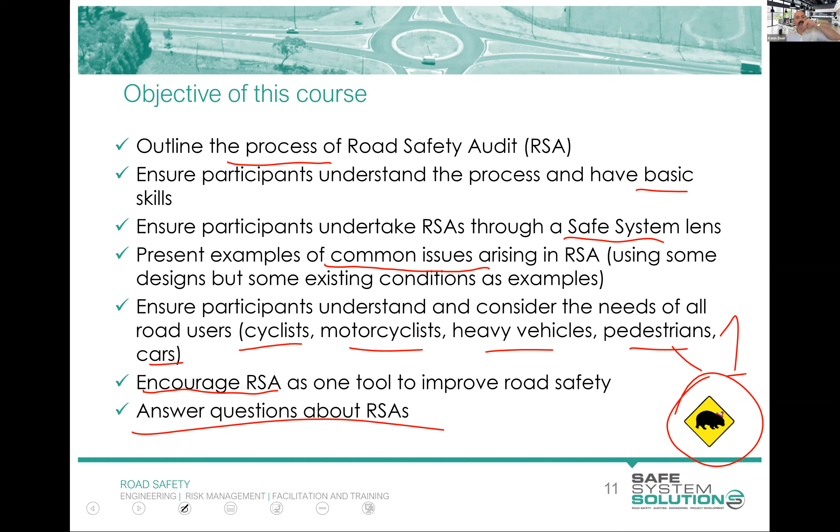Okay, going to be nice to you here. Wally count is 1. That's what you're looking for. That's all the help I give you for this course in Wally counting.

Okay, so where do you go to get all of this guidance and information about road safety auditing? Well, Austroads and a Waka Kotahi Safer Journeys document from the old Safer Journeys. They're the two key resources for New Zealanders in road safety auditing. Now, this document is very recent, and I was the project manager and specialist technical advisor to Austroads on that one. And that was released early this year.

This document's a 2013 document, and so it's a little bit old. It's got some really good stuff in it still. There is work happening now to shortly release some updated guidance. So I'm going to talk to you a bit about some of the new stuff in here that I know is going into future documents, some of the stuff in here that's going to continue, and give you hopefully a broad idea of what road safety auditing is and how you might go about doing that.

Now, this diagram is kind of complicated, but it sits early on in the Austroads Guide to Road Safety Part 6, which is road safety audit, that document I just showed there, and it talks about the road infrastructure life cycle stages from your network planning all the way through to operating and maintaining a road. And what it shows there are different safety interventions within those phases.

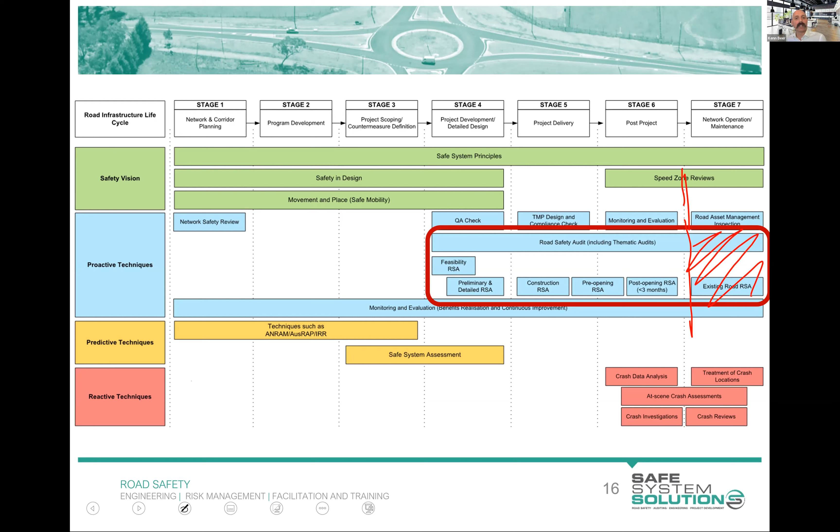The first thing, though, that I want to point out straight off the bat here is a common misunderstanding of road safety audit, and the reason for this is because of that term audit. People think an audit is like a financial audit where it is, are you complying with all of the standards and codes and the like? And immediately that is what people think about when the term road safety audit comes out. It is checking, did you meet all the standards? Well, that is not what a road safety audit is. Okay, a road safety audit is not a standards review.

However, we may review how things are in comparison to the standards if we believe there's a safety issue. But certainly, as a road safety auditor, you can look at a new design, a plan, and it can meet all of the standards, and you may still report a risk, a hazard that you are concerned with. And that could be because the standard is deficient, right? Or the standard's been around forever and nobody's critically looked at it and we know it's an issue. So it could be that. It could be the way that the standards combine, right? And it's just that you can't have foreseen all of the ways standards will come together.

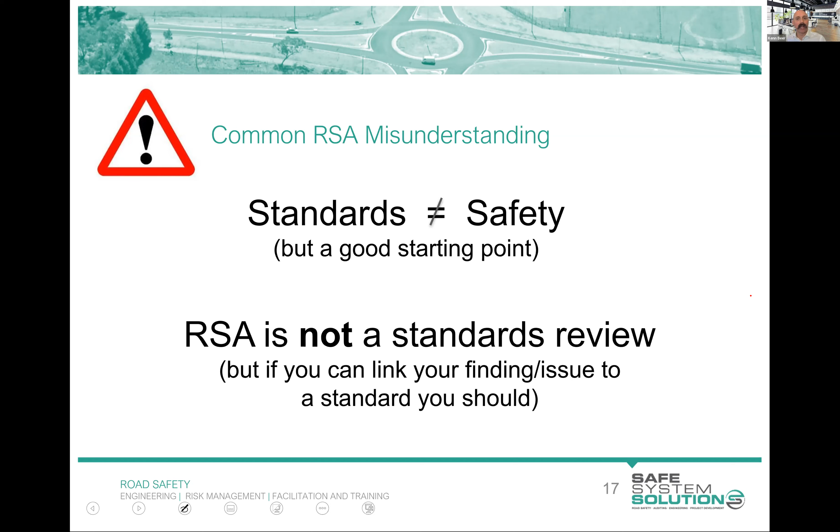However, there are some really good fundamentals with a lot of the standards and guidelines that we have, and those should be something that we're referring to and knowing about. But I think the easiest way to explain that conundrum of safety versus standards is just an example or some examples. So I'll jump into that.

And I'm going to use this example of a crash on a fairly new motorway. Unfortunately, this was a fatal incident. The heavy vehicle driver was killed. And the design was done by amazingly experienced, big multinational organization designers, and it was really good design. The road was built, and it's a really high quality road.

But fairly early on within its opening, this incident happened, and you scratch your head and you say, well, how can that happen? How can we build a $1 billion road and then fairly early on somebody is killed on that road? And you look at the design of this and you think, okay, well, what happened here?

Road safety audits aren't about crash reconstruction, analysis, and reactive looking at crashes and working out what happened. But I use a lot of this in the course so you have a better ability to predict crashes in the future. So knowing what's happened in the past helps you predict a little bit what's happening in the future. But the design of this road had a barrier system on the approach to the overhead gantry here. And you can see the barrier system there.

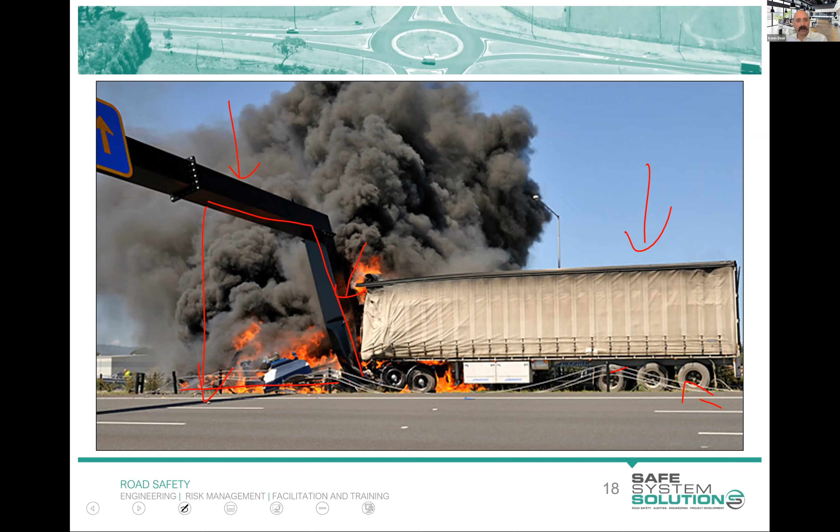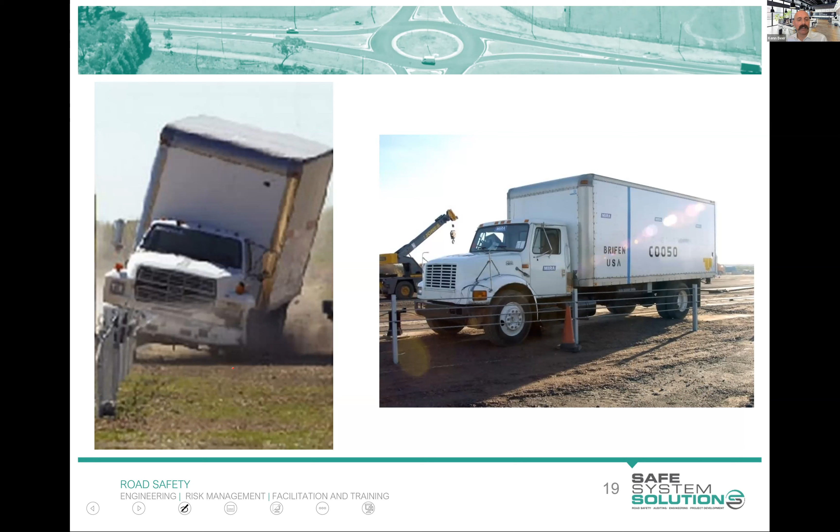Let me give you another live example of something that is a common road safety audit issue that I see a lot of, and I'm sure you will see a lot of as you get out there, and some of you will have seen a lot of these already. This one just happens to be a duplication of a road, a major new subdivision here, huge subdivision, big, massive complex with shopping center bits and apartments and everything. So it's massive. And so it's a signalized intersection that's being created. There's the duplication of the roads, some realignment, quite a bit going on there.

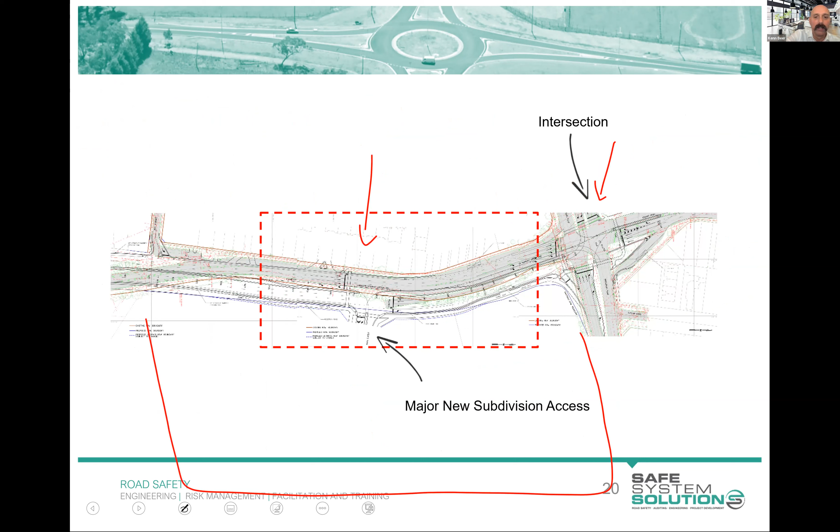If I go back a slide here, you can see that there's an existing large intersection up here, and the new bit is there. So basically all of this is new subdivision sort of complex. So anyway, if you're a car here and you're traveling along, it's a 60 km/h speed limit. So maybe you're traveling along a little bit faster, maybe 63, 65 or something, ticking along, and all of a sudden you are in a right turn lane.

Now, we term this a trap lane, okay? And it's one of those terms in our industry that I just marvel at and go, whoever named that just deserves an award, because it is exactly what it is. You are trapped, and you can have left turn trap lanes, right turn trap lanes, but you are basically driving along and forced to do something you do not want to do. Your lane ends. Now, what we would like to see is that lane continues straight through, and in order to do a right turn, you have to deviate off into a new lane.

That's nice, but it comes up surprisingly often that we see a new design with a trap lane in it because of land constraints and the different challenges that project teams have. Huge challenges in cost, in cultural heritage, in environmental, in earthworks, and all of these different things. And the way it configures is that they want to introduce this trap lane. Our role as road safety auditors is to identify that, and I'm sure that the designer knew that they were creating a trap lane there, but decided that was just something that had to be accepted because they can't do anything else in their mind.

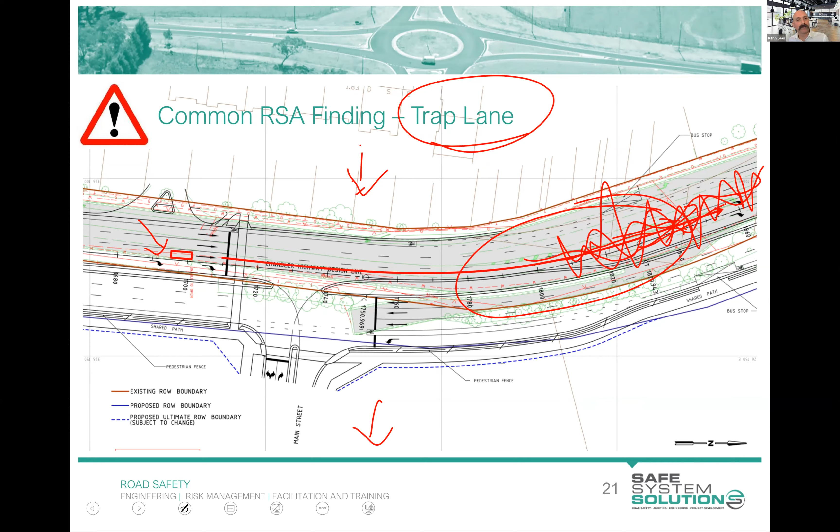Okay, enough talking out of me. I'm going to get you to do some thinking and some looking and some analysing. So we're going to analyse a crash now. But remember, road safety auditing isn't about analysing crashes. It's about predicting them in the future and trying to weed them out. But it's always good to try to unpack them so you can do that in your mind for future scenarios that haven't occurred yet.

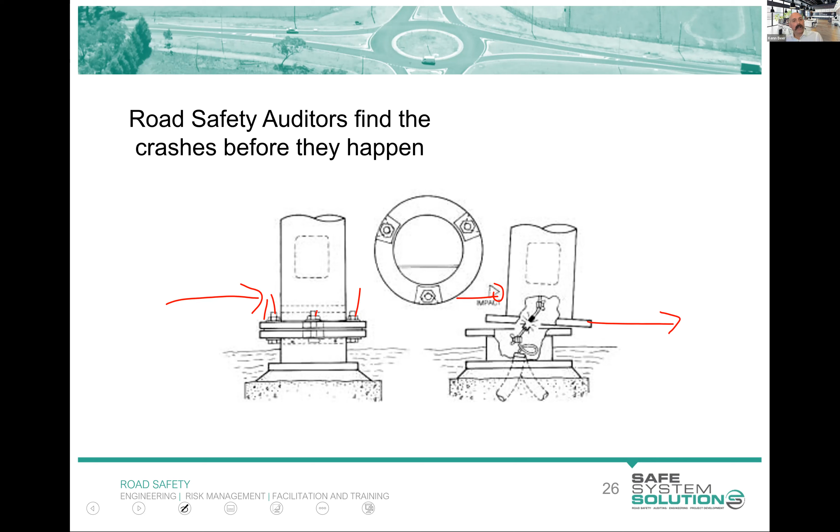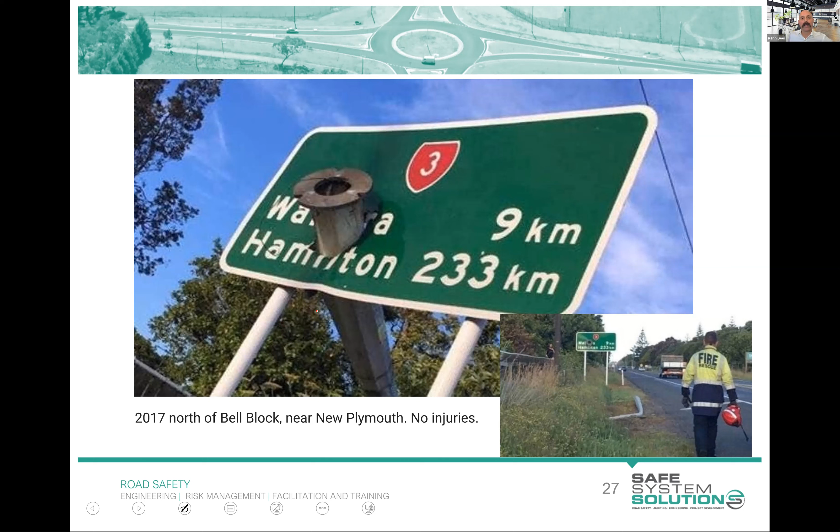Now, we certainly have those in New Zealand. There's an example of a slip-based pole in New Zealand that flung its way through a reassurance sign there. Nobody injured as a result of that. You can imagine the speed that must have happened in order to get that up there. But you imagine if that was a fixed pole, we would certainly be seeing death or serious injury, at least for the occupants of that vehicle. So a wonderful road safety feature.

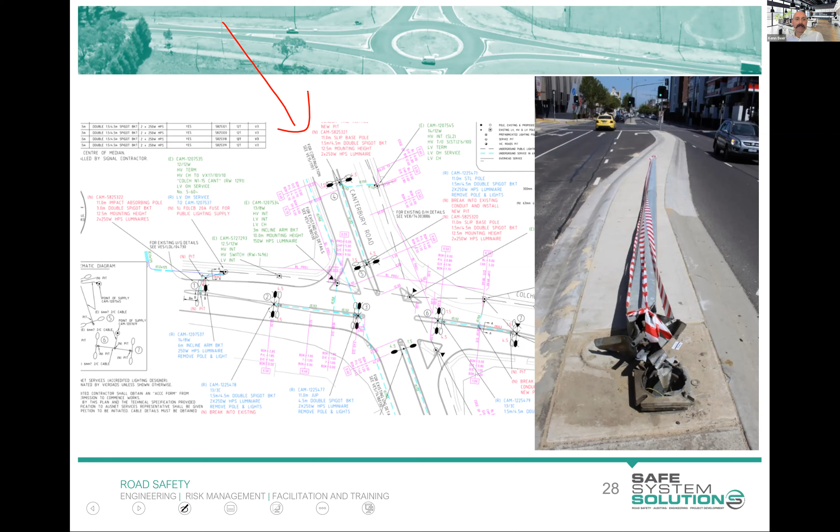Now, here's a random New Zealand street, and I suppose the question I have for you now is, why would or would it not be appropriate to have slip-based poles on all of the lighting in this location? So is that a good thing or a bad thing? If a vehicle leaves the road and they hit the pole, we want to make it as friendly as possible. Is it a good thing? And what are the risks associated with utilizing slip-based poles in these locations? Okay.

Yeah, so lots of good points there. I think Nick was in first with the main one I was looking at, which was hitting pedestrians or the like. So you have to understand and balance that risk.

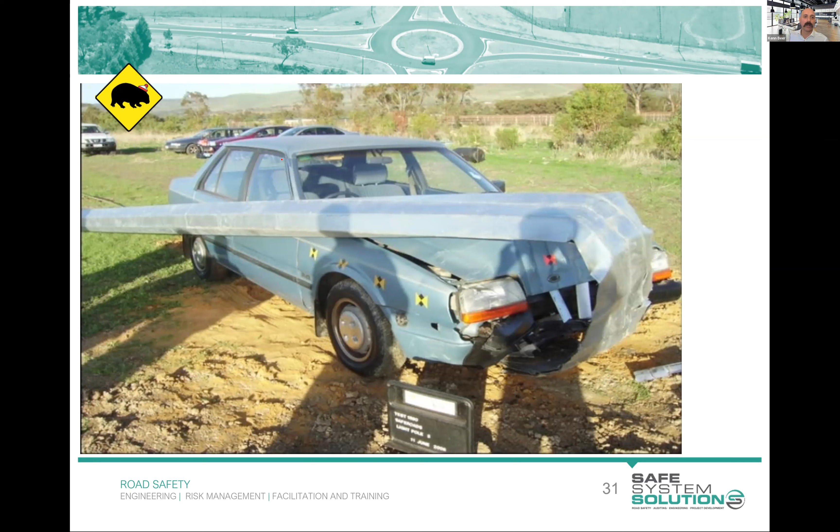So you can see here an example of the pole, and it sort of wraps around the vehicle to a degree and stays within that. It gives it a bit of extra cushioning, but it's certainly not what you would use in high-speed environments because you lose a lot of the advantage of that complete slip base. And also in areas with high numbers of pedestrians as well, you're still going to have something that sort of comes down. But it is another option there.

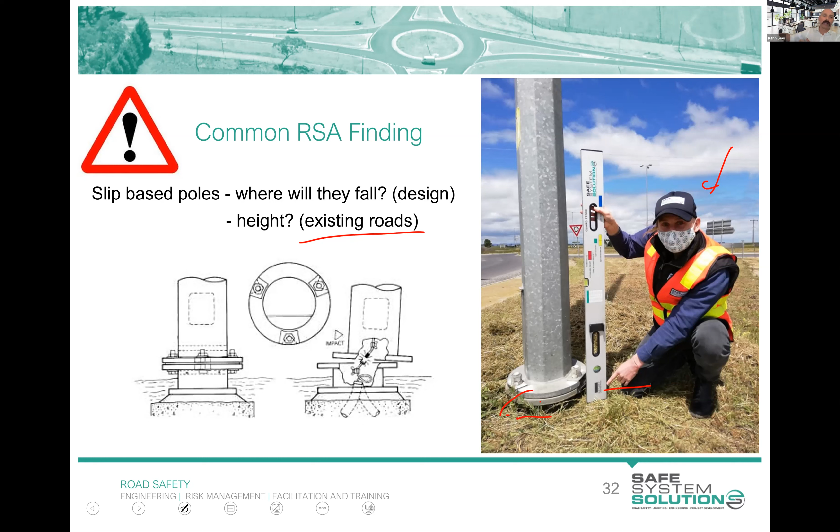So you can start to see now when you get that design and you're looking, okay, this is rigid and vehicles will be leaving the road at high speeds. We really need to make this breakaway on impact. Slip-base is right, or that would be dangerous because if I hit there, it'll fall into a pedestrian area. And so you're trying to proactively think about risk before the crash happens. So road safety audits are proactive.

The black spot investigation or crash reduction study is more your reactive treatment. So if you're looking at a route, it's got a significant crash history, and you're going to analyze the crashes, the types of crashes, the locations of crashes, the details of that, and come up with maybe a crash matrix and crash diagrams and all of that sort of stuff. You're doing a crash reduction study. You're doing a black spot investigation.

It still will come out with infrastructure improvements that could be made, but the audit is really when you've got a design in front of you. They plan to do something, or they've recently built something and you're checking. And you're saying, what are the crashes that could happen when they build this new road, when they create this new roundabout, when they build this new shared path, when the new bus interchange is built? Yeah. And you think through how a road user is going to use it and what crashes could happen.

A question that often comes up is, should you look at the crash history as a part of a road safety audit? And there is no right or wrong answer to that. There's a bit of personal preference associated with it, but there's also a bit of understanding of what is the scheme that's happening? What is the change that's happening? So take, for example, my little comment there about a new bus interchange. And maybe it's a whole new thing, and the whole area is being transformed significantly, new roads, new changes. Maybe it's a big interchange. The crash history of the site is somewhat irrelevant because it's all going to change.

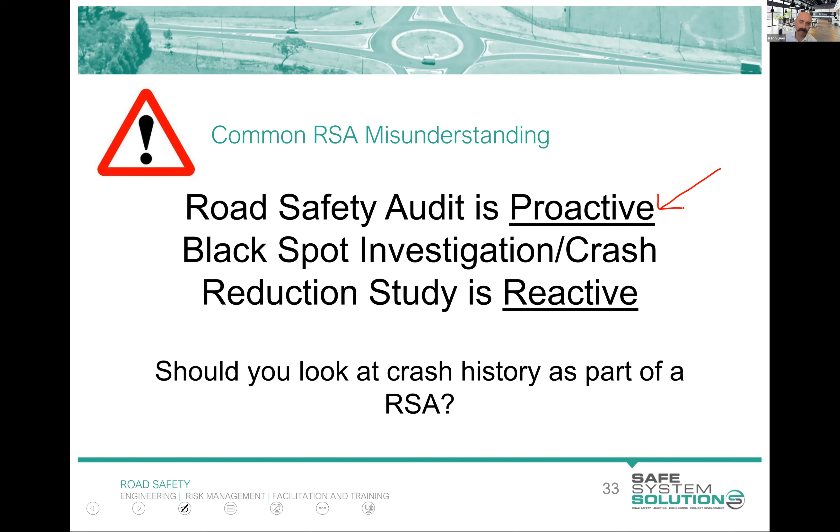Some random sort of evaluations around the world of road safety audits showed some pretty amazing benefits. So the biggest one was out of Canada, and it showed a benefit cost ratio of 36:1 for undertaking that road safety audit at the design stage. And quite a few jurisdictions do these existing conditions road safety audits, which is kind of this hybrid mess of a crash reduction study and a sort of existing conditions, just look at a road, but that was at more of a 6:1.

And the reason for that change is that at a design stage, altering the design with lines and changing the lines and how something will be built is very low cost in most instances. Sometimes there's added cost to it, sometimes it saves money. But when you've got existing roads, it's actually going to be physically changing something and building something. So there's a difference in just the cost associated with that.

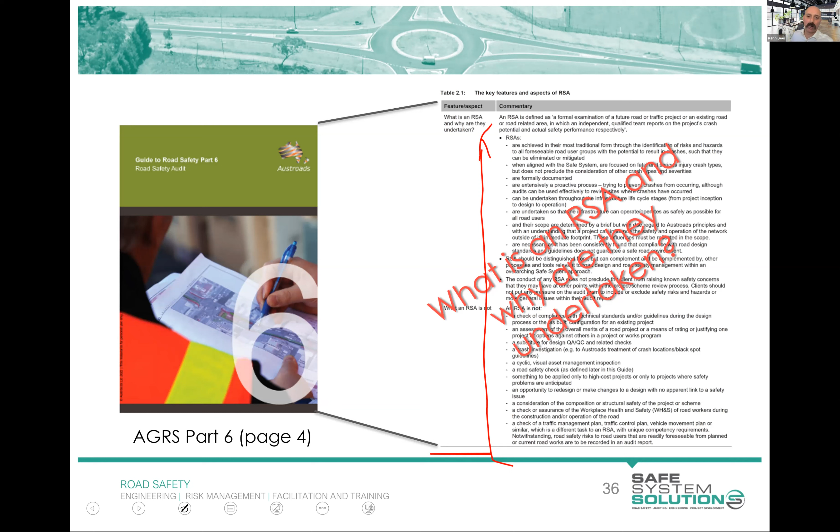So road safety audit is defined in the Austroads Guide to Road Safety Part 6, and it's a big definition. It's on page 4. And so I'm not going to go through and just read aloud all of that text, okay? Because you can do that yourself. There's lots of things in there that talk about what it is and what it is not, what it should include. I'm going to take you through this throughout the course, but I've picked one particular thing out of that, which quite well sums up the overall fundamentals of road safety audit, and I'll grab one from the Waka Kotahi document as well.

So it's a formal exam. I've got some key words highlighted here. A formal examination of a future road or traffic project or an existing road or road-related area in which an independent, qualified team reports on the project's crash potential and actual safety performance respectively. So some key things there.

This is a formal process, and next session, I'm going to take you through the steps of a road safety audit. It's not just a casual check of a design. It's not just going out to a site and having a quick look and jotting down a few notes. That's not an audit. That can add value to a project, sure, but it's not that road safety audit process. Future projects is what we're really looking at. What are the future changes? How are we going to alter that?

Not as much existing conditions for New Zealand, but in Australia, you can do these existing conditions road safety audits, looking at what's currently there, what are the risks and the like, regardless of crashes. You may integrate crashes into that. Independent is really important, and independence is held really as an important part of road safety auditing.

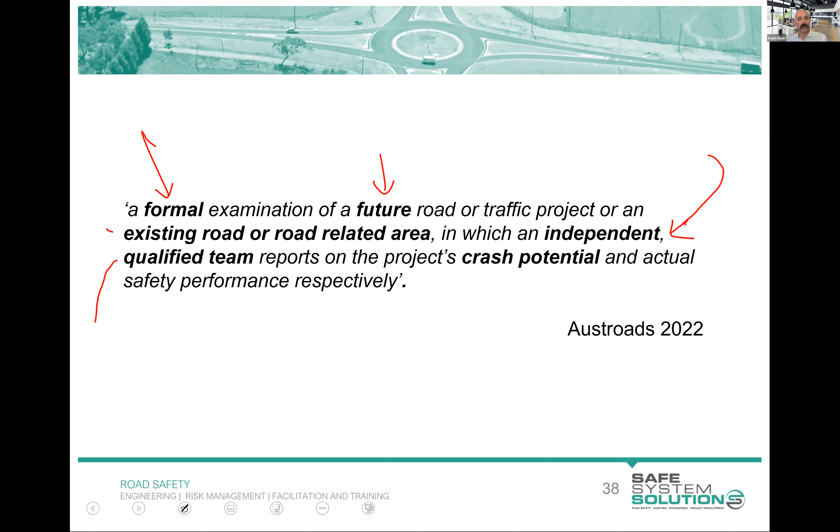So in the New Zealand document, we see that independence really clearly highlighted there. Independent review of future road projects to identify anything that affects road safety. The audit team considers the safety of all road users. So that's important. It is for all road users. Qualitatively reports on road safety issues and opportunities to improve safety, intended to help deliver a safe road system, is not a review of compliance with standards. And well played, New Zealand, for putting it in that clearly.

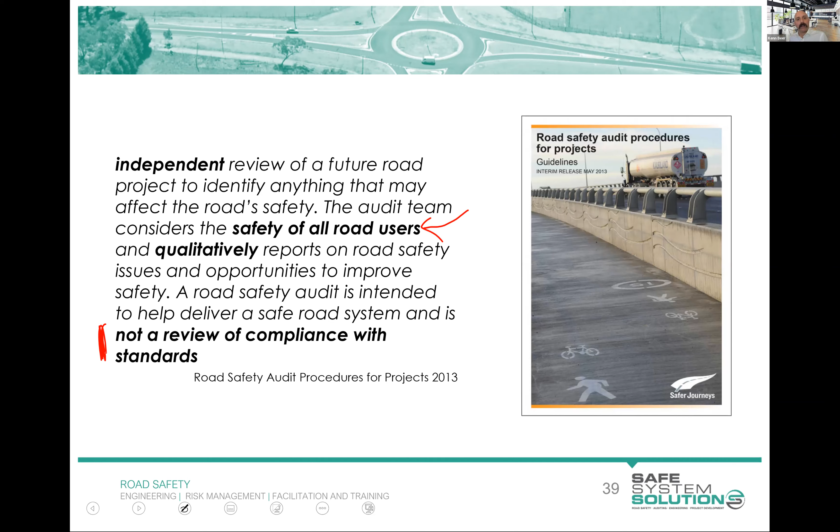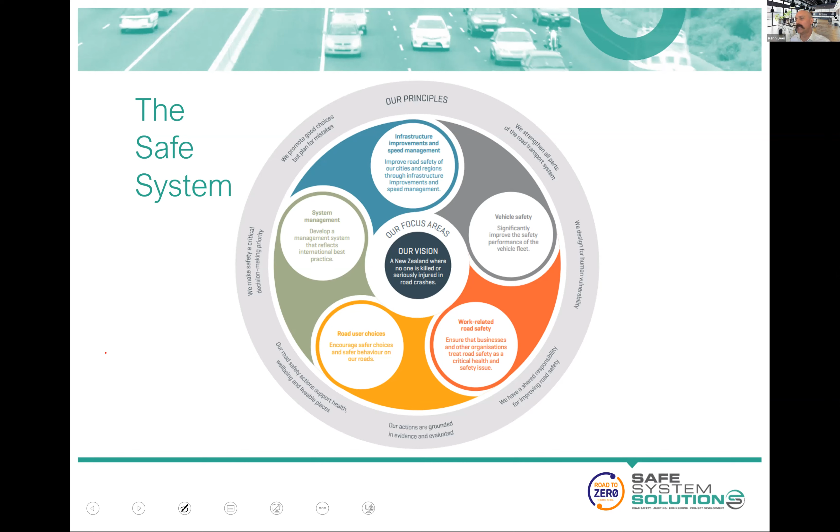So the safe system is the philosophy under which New Zealand is operating to improve road safety. A lot of you are very familiar with it, and once again, well played to Waka Kotahi on getting people to understand this and how it integrates into their work across the entire industry and varied industries, which is great. So many of you are very familiar with this diagram, and I don't need to go into it in a lot of detail. And certainly the principles of the safe system operation that you can see there are integral to road safety auditing.

And a few of them are really, I suppose, very important. So this human vulnerability, and we talked a little bit about crash severity, a little bit like a safe system assessment. We do a bit more analysis now of the impact of crashes that are going to occur, and so how bad a crash is going to be. We have that shared responsibility.

So again, a road safety auditor is not trying to just say, well, it's just inappropriate behavior that would cause an issue. Are there things we can do in the infrastructure to try and alter the scheme so it's less likely there's a crash to happen? And if it does happen, how the energies are down. And yeah, a few of the others sort of relate, but I'm going to focus a little bit on that one as we go through.

But safety is a critical decision-making priority. So the importance of a design, be that a design of a public transport facility, active transport facility, congestion project, or the like, really has to be subject to this independent safety review throughout its design. We would like to see a safe system assessment done early, setting the fundamentals of the project, and then road safety audits ensuring that all the specifics are getting the best safety outcome possible.

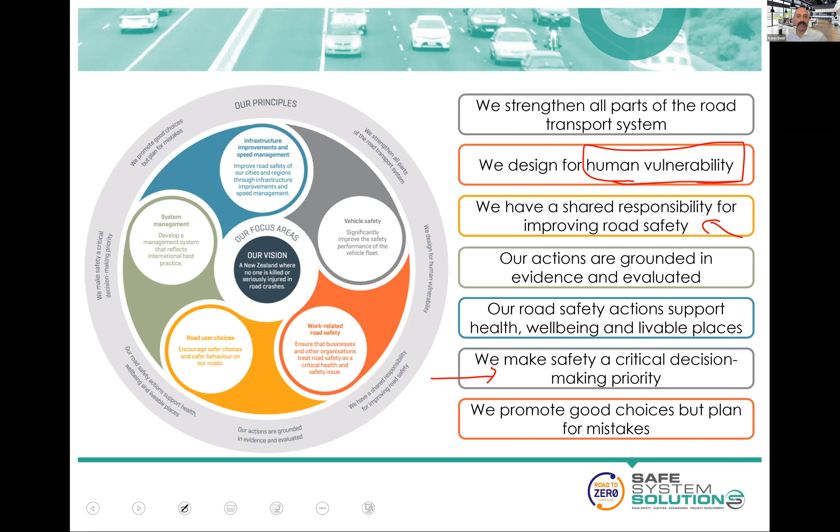Okay, Kathy, I'm just going to check here if there's any questions or the like that I need to deal with. Okay, and the quiz has popped up on the screen. So hopefully you'll be able to see that. Now, you are not being marked on this. I've got to stress that. You're not being marked on it. This is just a way to consolidate your thinking. I want you to answer the questions. And the first few we have gone through. Okay. And the last one, unless you came to the safe system assessment course, we have not gone through. So have a go at those. And then have a stretch and we'll go from there.

Catherine: Thank you, Ken. Sorry, there was just some chatter in that last little bit there about the definition of qualified and whether or not we have a register in New Zealand at the moment for road safety auditing. And I know you'll go through this in more detail in the last session, but maybe just a quick little wrap up on where things are at there. Yeah, thank you. There is no register for road safety auditors in New Zealand. It is on a project by project engagement of the auditor and pushed to the project manager to determine suitability, qualification.

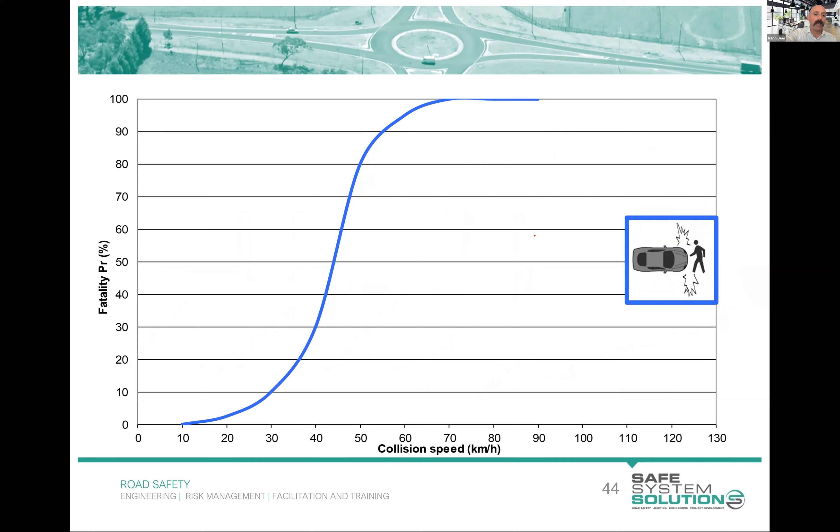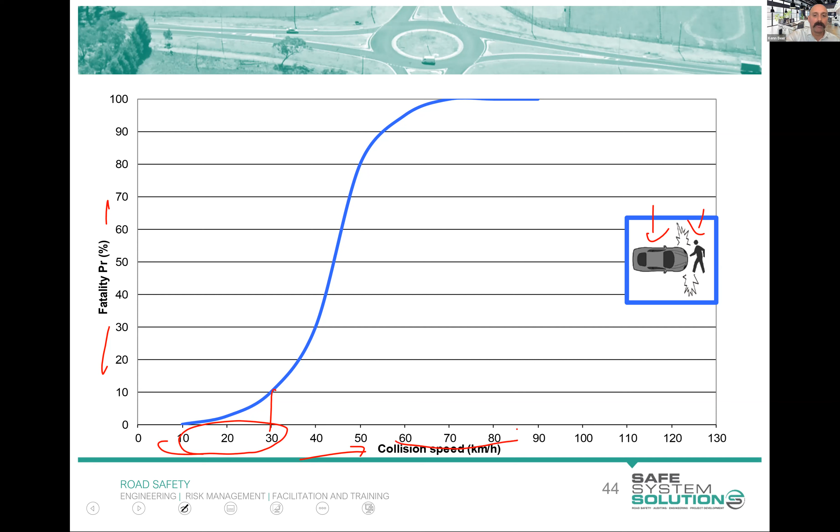So collision speed down the bottom, that's speed of impact, and this one is of a passenger vehicle hitting a pedestrian, and this is fatality probability. And we see there that around 10, 20 or 30 kilometers per hour, highly survivable for the bulk of the population. Up around 60, 70 kilometers per hour, where vehicles hit people, pretty likely to be killed. And it kicks up exponentially from there.

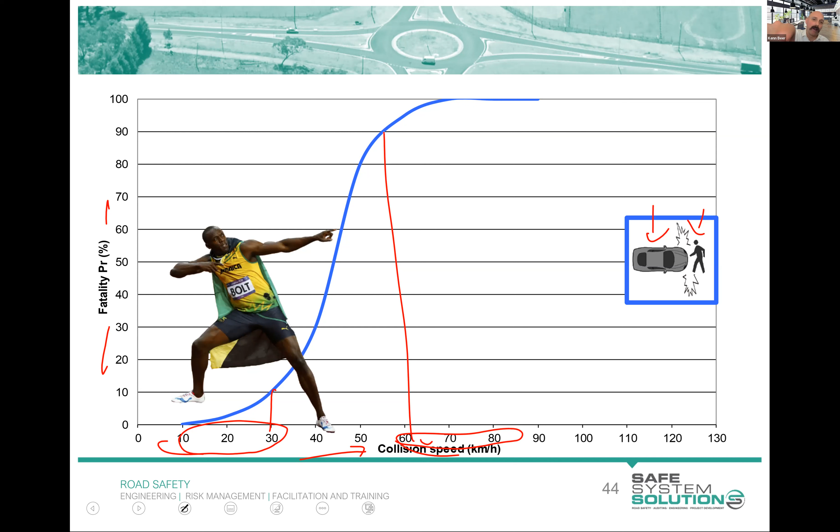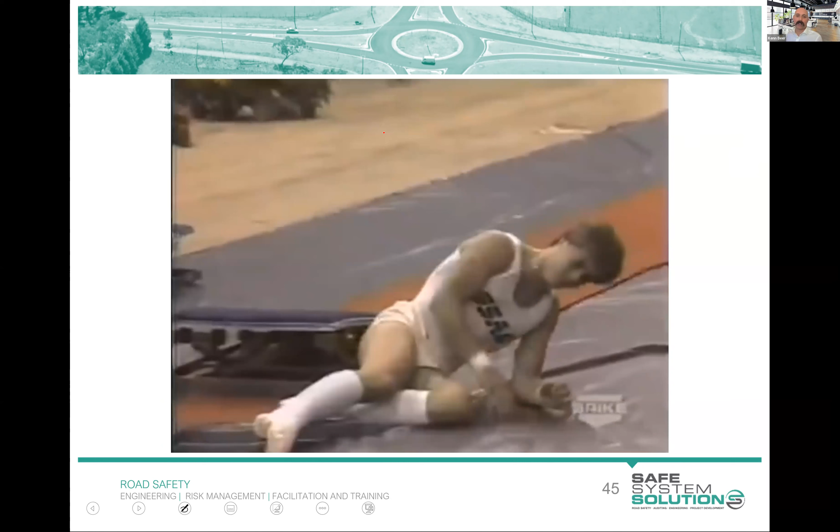As Usain Bolt comes in there, the analogy is if he ran directly into a car at his maximum speed, would he survive? He's very strong, a hulk of a human. He will likely survive at his maximum running speed, but this graph is really trying to represent the entire population. And of course, we can show our example of energy humans are able to survive, and that's what we're designed for. It's not fun, it hurts a bit, but we recover to lead a normal, healthy life after running into solid stuff at our own speed. But when we go faster than that, run into solid stuff or stuff comes at us faster than that, we're in trouble. And so we need to think about managing that energy as well.

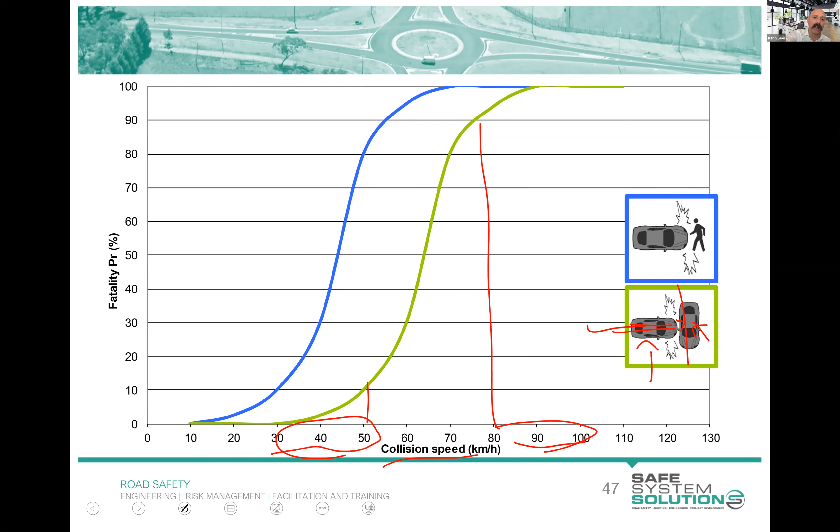And just like safe system assessing, road safety auditors are more and more now analysing the predicted severity of crashes under different crash scenarios, different vehicles, different crash types, different road users involved. And so again, we're going to look at right angle crashes as our next example, where the bullet vehicle is the one that does the damage, the striking, travel speed, so that's collision speed, not speed limit, just its speed of impact. Around 30, 40, 50 kilometers per hour, highly survivable, up around 80 to 100, very unsurvivable for the occupant of the target vehicle, big kick up around that 50 kilometers per hour.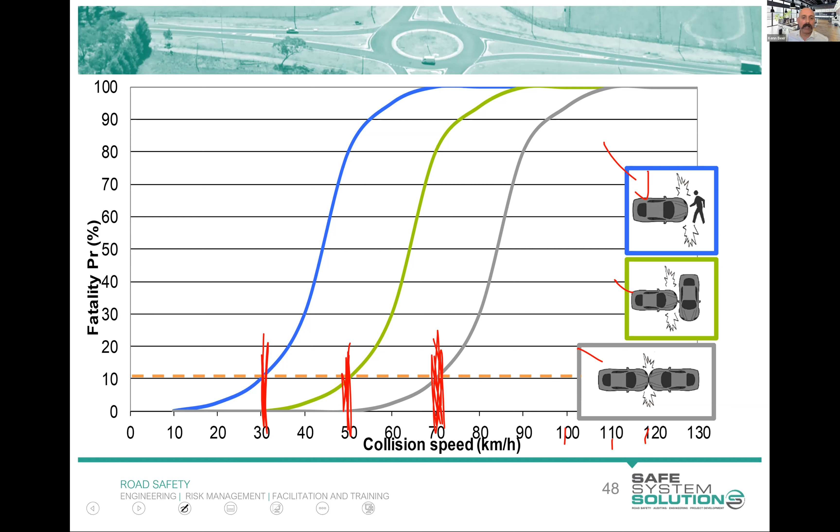70 kilometers per hour for head-on crashes, 50 kilometers per hour for right angle crashes, 30 kilometers per hour for pedestrian cyclist crashes. There's lots of work happening in looking further in detail at these, altering them for different crashes, different things, but generally still they're accepted as pretty reasonable places to look at the moment. And I've put those in there with a couple of extra ones just for something for you to turn back and look at as some general

impact speed thresholds. Now, in a safe system assessment, we're going to sort of hold you to some of these impact speed thresholds as saying, is it above or below that? But I'll get to that shortly. But take a note of this within the notes, just to say I may need to come back to this at some point.

Okay. The old model of road safety auditing was to identify issues, risk rate those issues, and then recommend changes. The new model is still to identify issues and risk rate them, but we want to assess the likelihood of fatality or serious injury based on biomechanical tolerances, which was what we just went through, and flag a few things there. We're still going to recommend treatments, but then we just want to categorize those treatments into how effective they will be and how much they align with safe system principles.

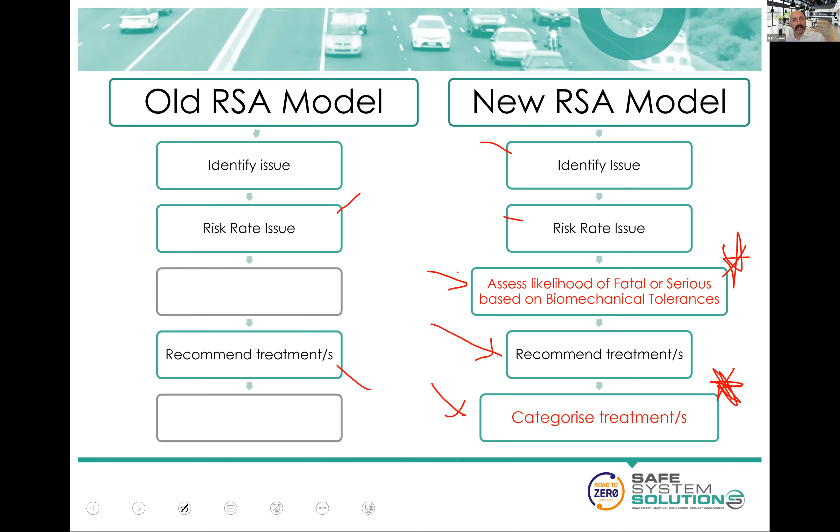So these two new ones, for anybody who has been doing road safety audit, is something you should start to integrate further into your audits. And the new templates that will be coming out and new guidance from New Zealand will sort of specify some of this. But the other bits are fairly well established there.

So I'm just going to walk you through a live example. It's often the easiest way to show those different steps. And I'm going to use this new intersection design as a way to do that. So you can see there, it's a new intersection. It's got a splitter island, and it's got a left turn lane, a right turn lane. It's a high-speed road, 100 kilometers per hour. Side roads also 100 kilometers per hour, but gives way.

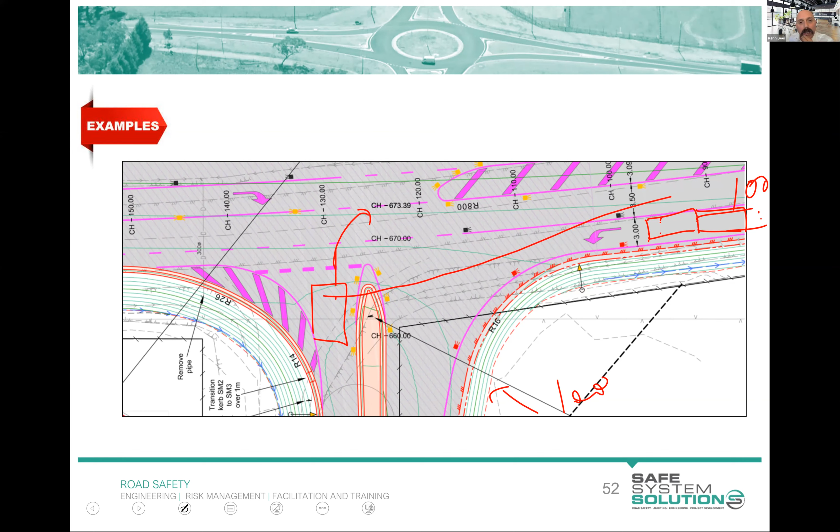It's a T intersection. And the particular issue I'm going to look at is actually what we call a dynamic visual obstruction issue. And that's when a vehicle is turning here, often a large vehicle. Me trying to draw a truck from above. And you've got a vehicle here, and this turning vehicle is obscuring the sight lines for the vehicle making a choice to turn out there. So let's have a look at that in a live scenario here.

So you can see there a vehicle's propped to turn right out of there, and they can see the truck there, and you can see a little bit of the white vehicle that's trailing behind there. And so, the truck's doing its turn, the white vehicle's there, and the silver vehicle in the foreground is basically in that position to say, well, as soon as that white vehicle's passed, that's my time to go.

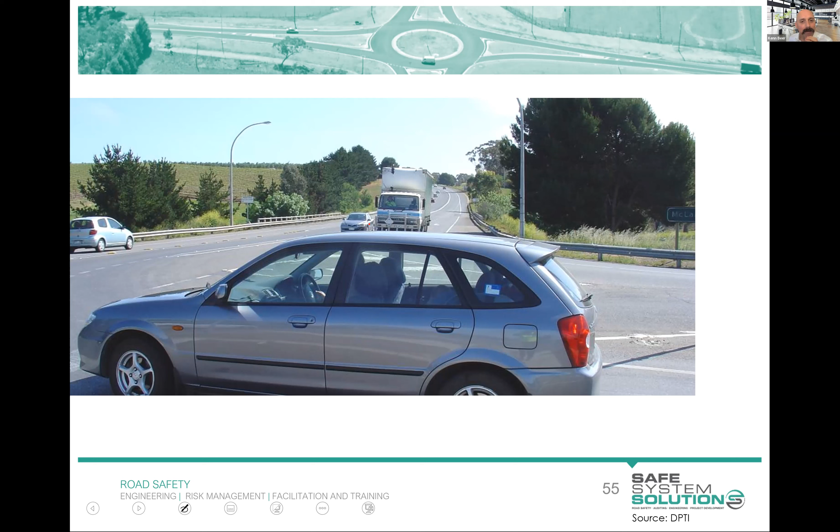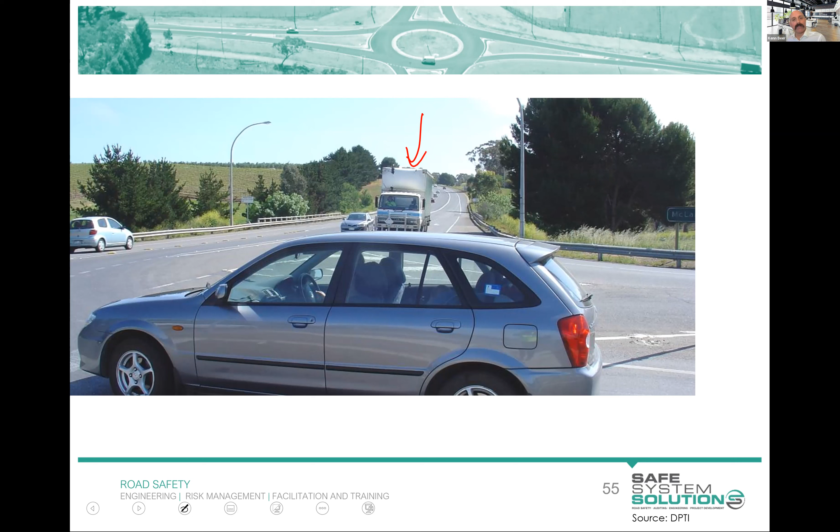But the whole time, this other silver vehicle had been masked. The vision had been masked by the large vehicle. What we would term a dynamic visual obstruction. And that dynamic meaning moving, dynamic visual obstruction. It stopped us seeing it. So it was masking it the whole time. And it's a fairly, I suppose, common crash scenario at an individual intersection sort of treatment. It's very rare, but we still see it often across the network. But this is something we may pick up as a road safety auditor before that left turn treatment is built.

So here is an audit finding, okay? And the first thing I want you to notice about this audit finding and the write-up of it, is a diagram. And where you can snip something from a design, do a little diagram, put in a photo, whatever way you can, it is so beneficial for the receiver of the audit report to see that. So you can see this one. They don't need to read all of this to get an understanding of what we're talking about, but the words are in there.

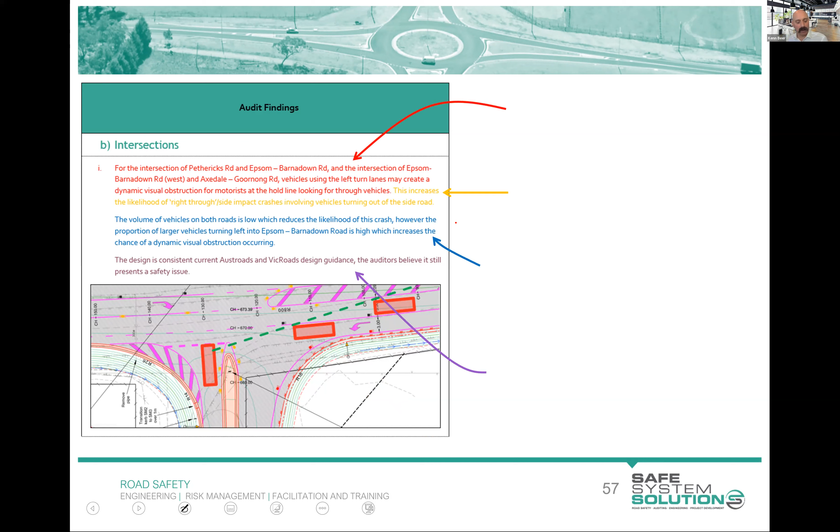Now, I'm going to give you a formula for writing an audit finding. Now, the formula, or some people call it a recipe, it is something that I give to new auditors because it steps you through ensuring you're covering the key elements of what we expect to see in a finding. So the first thing we expect to see is a description of the issue you're concerned with. So this one says, for the intersection of these roads, the vehicles using the left turn lane may create a dynamic visual obstruction for motorists at the hold line looking for through vehicles.

So it's described, and there's the picture, which is going to help. Then you specify the crash. This increases the likelihood of right-through/side impact crashes involving vehicles turning out of the side road.

Regardless of how obvious it is in your mind what the crash type is going to be, we want you to specify it. The reason I always stress this, especially for new auditors, is because there is a temptation often in road safety audits to put in things that people just don't like, or there's other issues associated with it. If it's very hard to peg it back to a specific crash, then it's not a road safety audit issue, it's some other project issue for others to work on. We are about preventing or minimizing the severity of the crash, and so that's why we ask you to spell it out, the crash type.

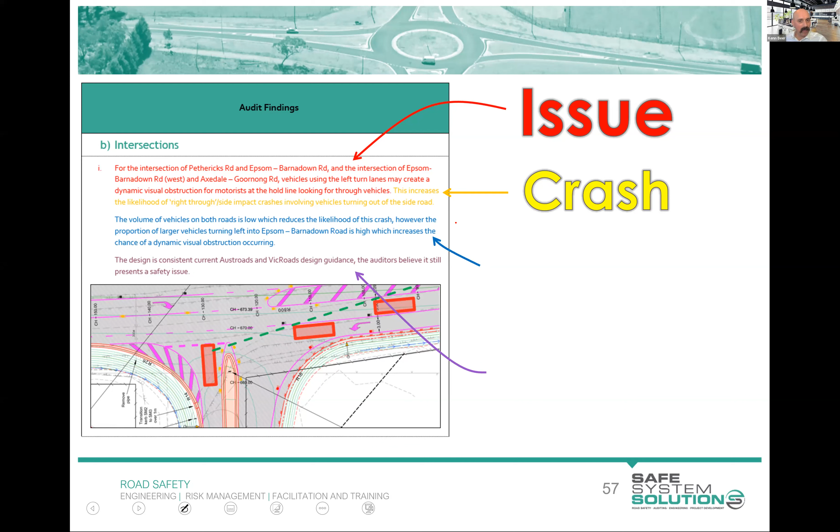So I want to see in your reports, specification of like a head-on crash, or a crash involving a vehicle striking a pedestrian, or a sideswipe crash, something like that. Then we put in there any risk factors, any factors that are making this more risky or less risky. So the volume of vehicles is low, which is going to reduce the likelihood. However, the large proportion of heavy vehicles making that left turn increases the chance of that dynamic visual obstruction.

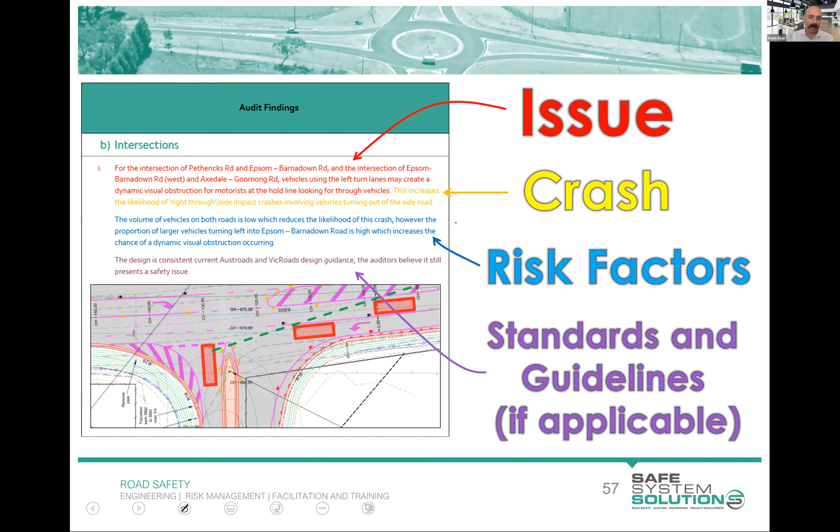Then if you want to, and if it's applicable, you can reference standards and guidelines. So this one happens to meet Austroads and VicRoads design guidance, and it's a Victorian example here. But the auditors still believe it presents an issue. There you go. Not a check against standards, because that meets the standards for that issue and how it's done. The auditors are still pointing it out.

So, risk. Quick prize. What does risk equal in the international definition of risk? Big sort of international risk equals something times something. Pop it into the chat. Right? Have I lost everybody? There we go. We're starting to get. Okay. Gemma's in there. Gemma, prize for Gemma. First in there with 2 comments, consequence, likelihood. Yes, and a few others popping it in there.

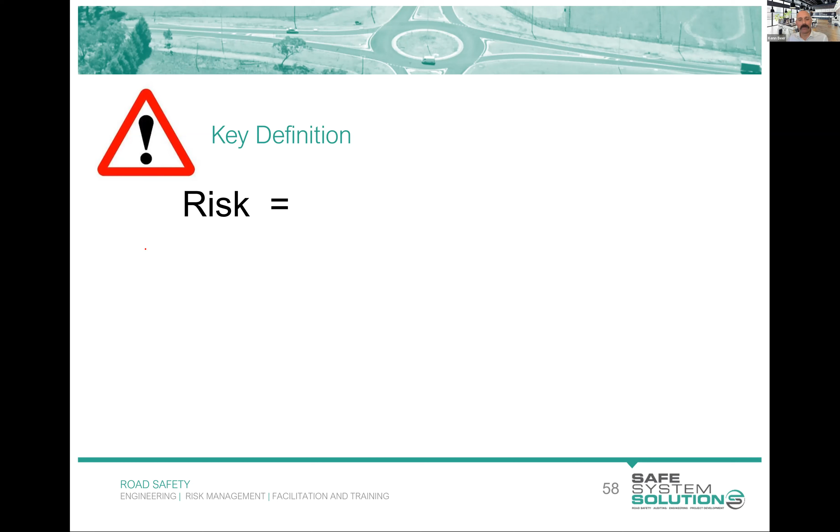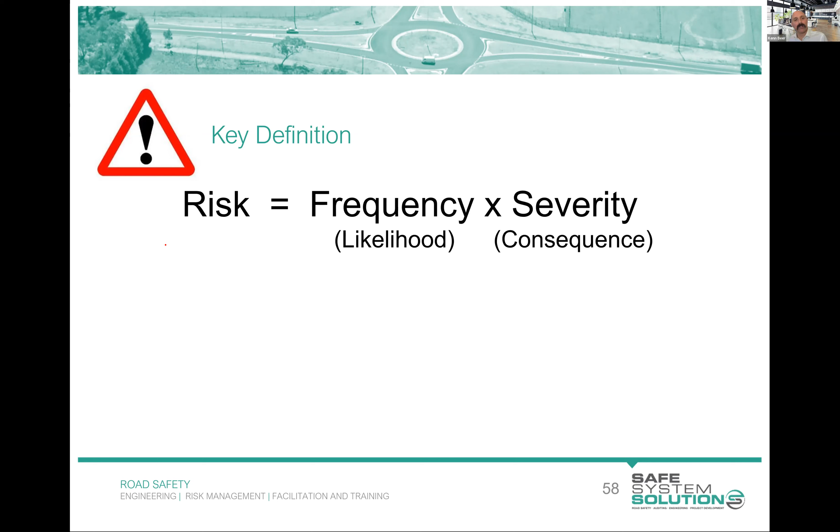So thank you. And so likelihood, consequence, frequency, severity, however you want to define it, it's the chance of crash and how bad that crash is going to be. As some of you who've been doing safe system assessments know, we extracted exposure from likelihood, but in road safety audits, we still just lump them together to get that international sort of risk definition the way it is.

Now, New Zealand sort of did this unique thing. When I first saw it, back in 2013, when New Zealand came out with this risk matrix, it boggled my mind for a while. It gave me sleepless nights trying to get my head around it, but I'm comfortable with it now. So it's fairly standard. You see a matrix put up, frequency of crash, so frequent, common, and the like, and then severity. But usually in severity, we put catastrophic, severe, low. New Zealand went severity, likelihood of death or serious injury. And the reason it boggled my mind is I'm like, hang on, we've already done likelihood over here, and now we're doing likelihood again.

And so I was weirded out by it, but I'm okay with it now. I've sort of got my head around it. And what I did was come up with a little bit of assistance to myself originally, and now I share this with some others to help people get their head around it. So the frequency includes the exposure. So how many vehicles are going through and what's the chance? That's all sort of packed into that one.

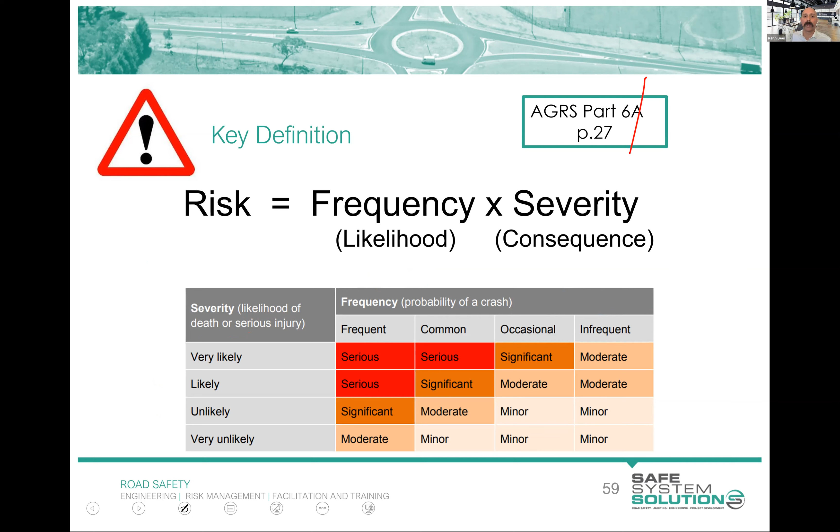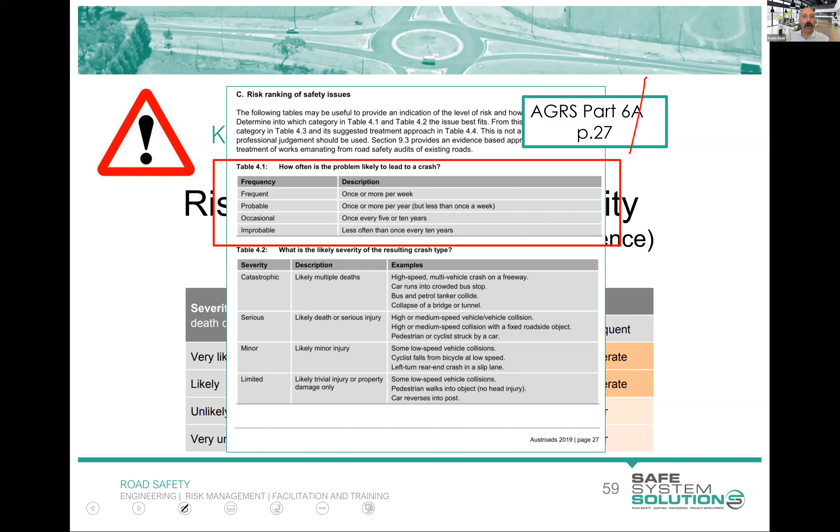And you can look at the Austroads Guide to Road Safety Part 6, not 6A, 6, page 27, which will give you some information on that from the Austroads perspective, and it can help you with the frequency of crashes there. But in the New Zealand guidelines, there is embedded in some of the text some information. It doesn't help you a huge amount, as I think Mike's sort of pointing out there, there's a bit of a lack there. There are a few things, 1 per year for frequent, 1 per 10 years for infrequent, and a lack of any other guidance there. So you make some judgment calls yourself there.

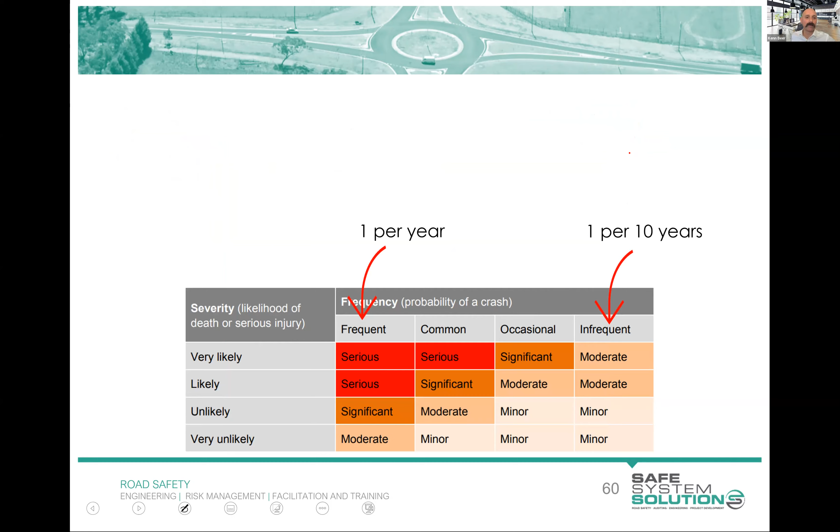But how do we go on that sort of severity? So the likelihood of it resulting in death or serious injury.

And this is where I sort of utilize the biomechanics of injury and safe system charts to help me a little bit understand this, or get myself comfortable that I've got something defendable if anybody was to ask. And I started to just peg them in that 10% tolerance into very unlikely, unlikely, likely, and very likely as a result of death or serious injury. So it's not perfect, but without any other guidance, that makes me fairly comfortable.

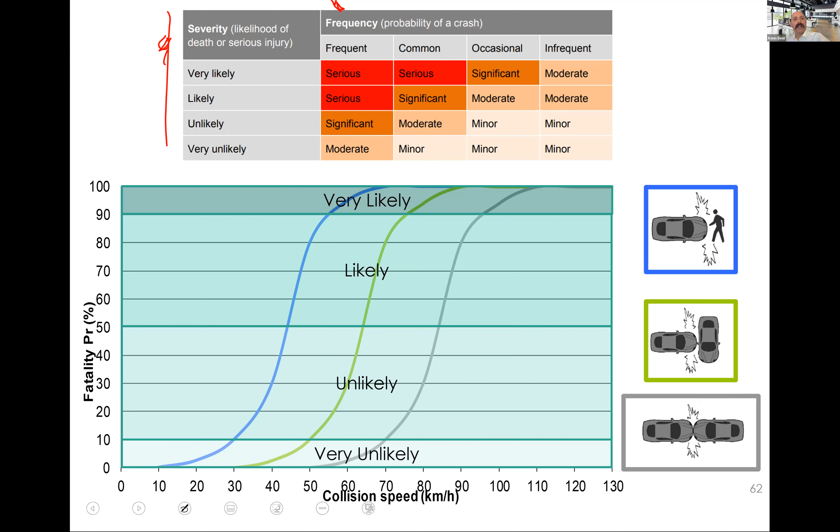Great. Well, let's go back to our live example there, and we're looking at the dynamic visual obstruction in this new intersection and Barnadown Road. And we see there, we've really nicely written up the finding using that formula. We've got a nice little diagram there, and we need to now say, well, what is the risk? And this is where we say, well, what's the frequency? What's the severity? And what's the resulting risk? And you go back to your charts to look at that.

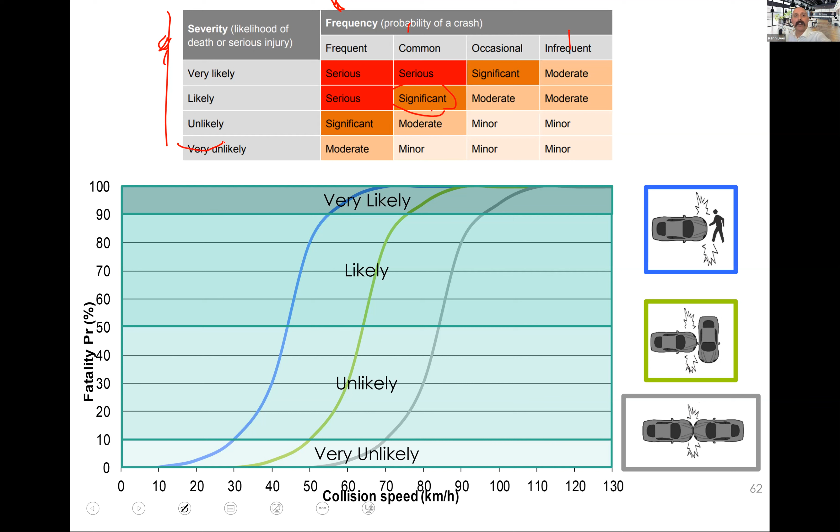Okay. And the colored ones in here are the risks. And this is the same with your occupational health and safety risk assessments or your financial risk assessments or whatever, you get to that actual risk by looking at the severity, the frequency, and coming out with your risk. And then what we want to do is come up with some sort of recommendation and think about what we can do to alleviate this.

And we categorize recommendations into primary recommendations and supporting recommendations, just the same way we do in safe system assessments. And in fact, I point you at the safe system assessment framework for examples of each of these. Those of you who have done that course, you're able to do it. We do the same in this. We're trying to make this a consistent way of looking at treatments. But a primary treatment is road planning design management that virtually eliminates the potential for fatal or serious injury crashes occurring in association with foreseeable crash types.

Whereas supporting treatments are planning, design, and management considerations that improve the overall level of safety associated with foreseeable crash types, not expected to virtually eliminate the potential of fatal or serious injury occurring. Also does not change the ability for primary treatment to be implemented. Now, if you are not familiar with this, I really do stress that you should go look at this document. It's a free document. In fact, we'll put it into Moodle, to just look at some examples.

Because if we are to take, for example, our intersection, if we were to say, remove the left turn lane, people will be tempted to call that a primary treatment because we have eliminated the dynamic visual obstruction issue that we're talking about. But actually, what we're saying is, have we eliminated the potential for death and serious injury associated with vehicles coming out here and striking vehicles here, that intersection crash in particular? And the answer is no.

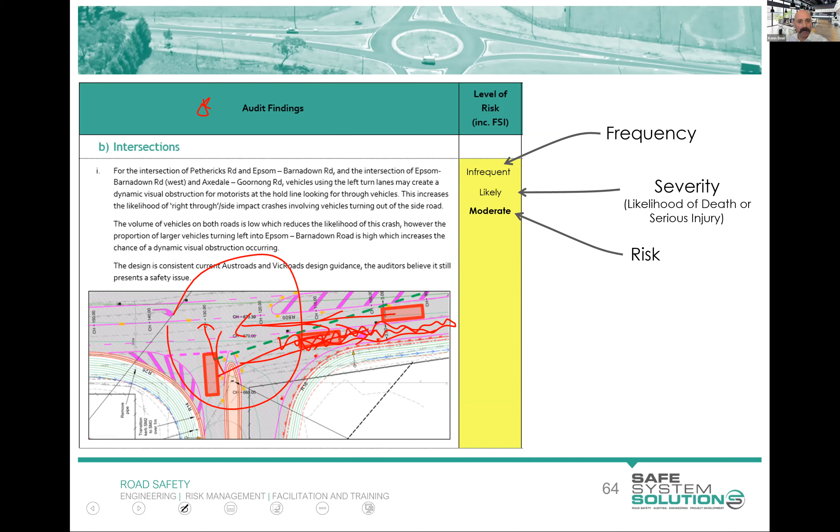So that would be a supporting treatment, not a primary treatment. So here you'll see that this audit's gone, implement measures to reduce the speed and or angle of impact at this location. This could be achieved with a roundabout, primary. The roundabout will reduce the speed, the angle, and virtually eliminate this crash type of intersection crash.

Now you see here though that it says, if this cannot be achieved, implement measures to improve sightlines at this location, such as increasing the offset of the left turn lane. This is where it would come down here further and you'd have some sort of buffer gap. So it opens up the sightlines. Relocating the hold line forward a bit, presuming it can be done safely. They are both supporting.

Now, this is where the auditor is trying to help the project team. Yes, we want to see this primary treatment. That's important. That's nice. But literally will cost millions and millions of dollars more than what's happening here and may not be feasible. So they've provided some other sort of options. And there might be more. It might be that you're doing a RIAWS, like a rural intersection activated warning sign, or other features that you might think is possible. In fact, that's what Wayne has just put in there.

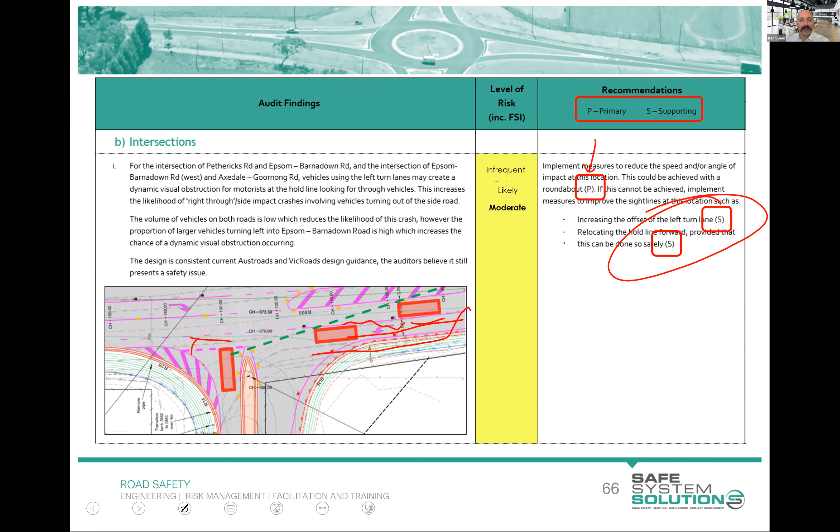So let's not get into too much of the detail on that. I was actually just doing this. We were doing an audit, a colleague and I, on this particular one, we had exactly this issue, the dynamic visual obstruction one. It just happened to be an area where we also had some recommendations around cyclists. We were a bit worried about cyclists at this location because they had a shoulder and then they lost their shoulder, and so we were then suggesting, and we just mocked up for them.

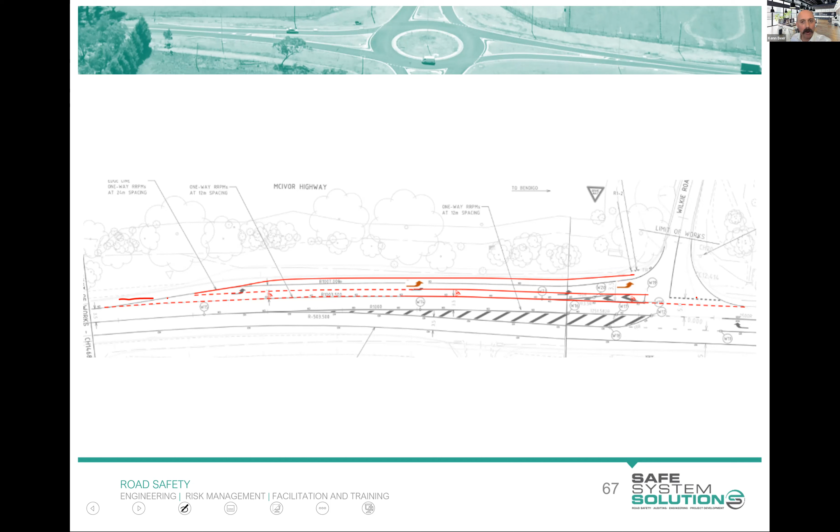We're not redesigning. We just said, this is what we thought might actually be quite neat here, which is that you take your shoulder and you put a bike lane through, and you offset your left turn. So you'll open up the sight lines better and you'll provide a bit more space for cyclists. And it's going to cost them a little bit more because they've got to move that left turn over, a little bit more earthworks, but we think it's a good outcome. That was just an aside.

Little audit tip: to be categorized as a primary treatment, it must either address the consequence of the crash or virtually eliminate the possibility. And when I say virtually eliminate, we're talking about including general human error. But really, I just stress, have a look at that Safe System assessment framework. It gives you a whole lot of examples and you'll get your head around it. You'll get quite a few opportunities to practice this throughout this course.

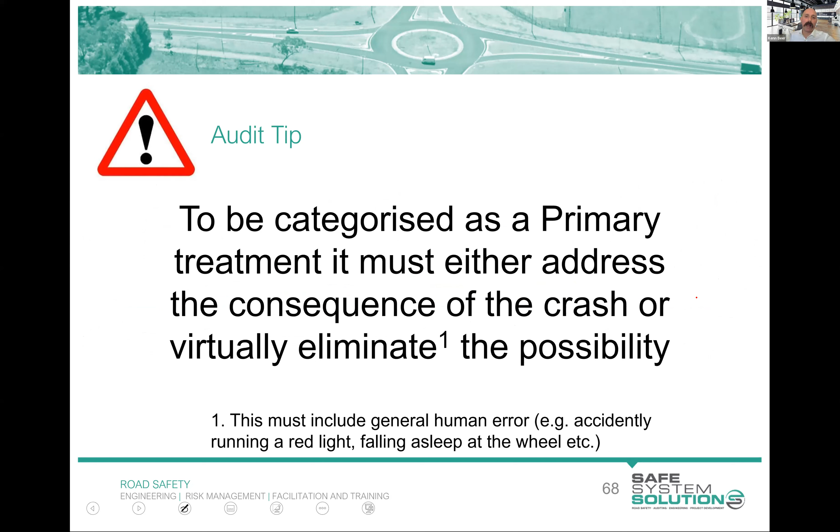So the New Zealand RSA template, the Word document that you can download off the Waka Kotahi website, and we will be giving you a copy of this to work with, has some drop downs that help you with that risk rating. You just use those drop downs to put in frequency and severity, it'll spit out the risk, and it'll help you in that.

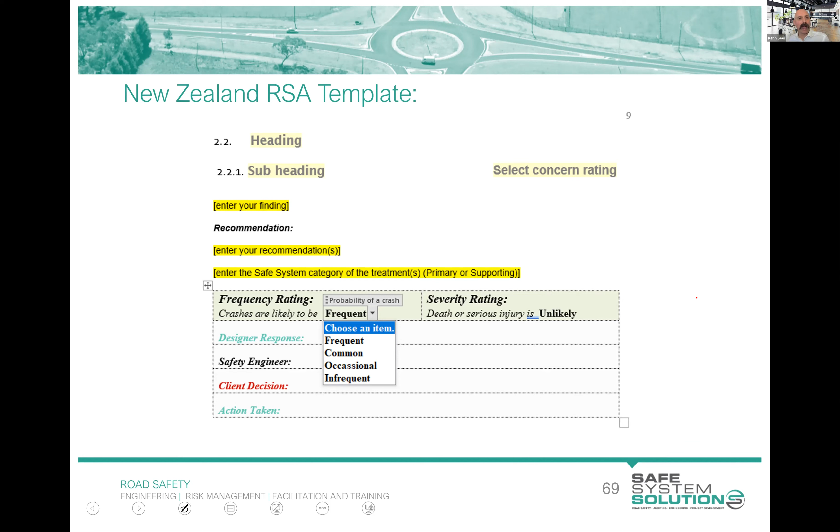Ken, sorry, can I just jump in with a question quickly? Earlier when you were talking about that example, a comment came through saying basically it's safety in design. Well, it depends whether you're taking a literal safety in design term, or you're talking about safety in design as the process.

So there is a particular process called safety in design, which has specific ways of looking at the ability to construct infrastructure, maintain infrastructure, operate infrastructure safely, and decommission infrastructure safely. The road safety audit is focused on that ability to operate the infrastructure safely, and can it be used by all road users, and has a further in-depth focus on that. So while I agree with you, it is the safety within the design, has the design got inherent flaws and the like.

Just be careful with terminology there, because safety in design has its own thing. So if you were to say, I don't need to do a road safety audit because we're doing a safety in design workshop, again, no. Both are providing value in their own specific ways. But yes, it is lowercase safety in design, absolutely.

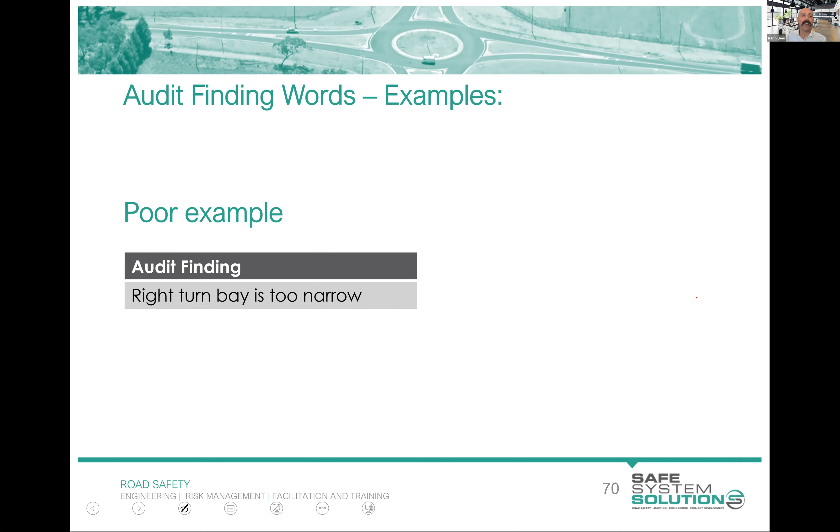Okay. Just some wording stuff. Here's a poor example: right turn bay is too narrow. Here is a better example: right turn bay from road A to road B is too narrow. Concern is increased potential for sideswipe crashes, rear end crashes. Austroads guide states 3.3 metre minimum.

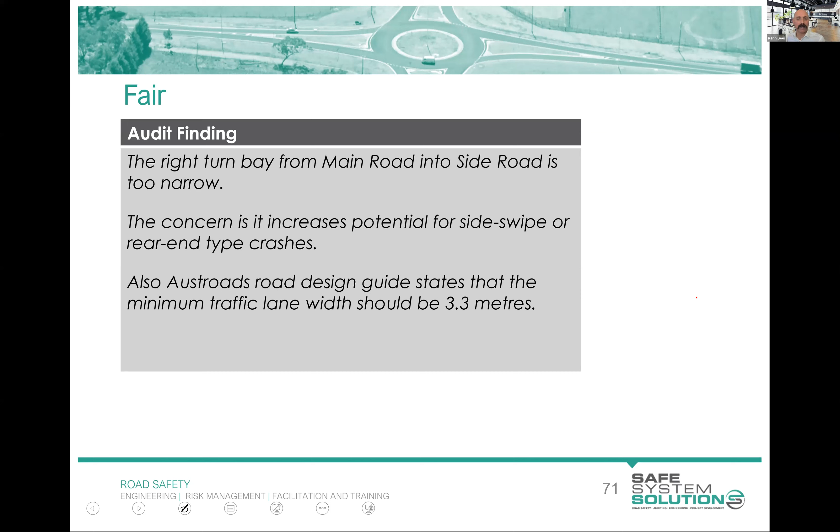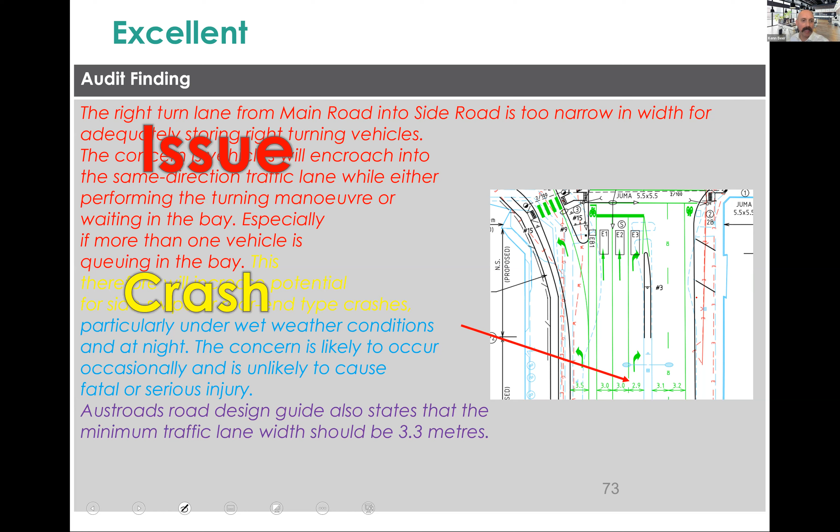But you can see here we go back to our formula. The right turn lane is too narrow to adequately store the vehicles. Concerning vehicles will encroach in the same direction lane while performing the maneuver, blah, blah, blah. This, therefore, will increase potential for sideswipe or rear end crashes. So specifying the crash type, particularly under wet weather conditions or at night. The concern is likely to occur occasionally and is unlikely to cause fatal or serious injuries. And then the Austroads guidance: the issue, the crash, specify the risk factors, and the standards and guidelines if applicable.

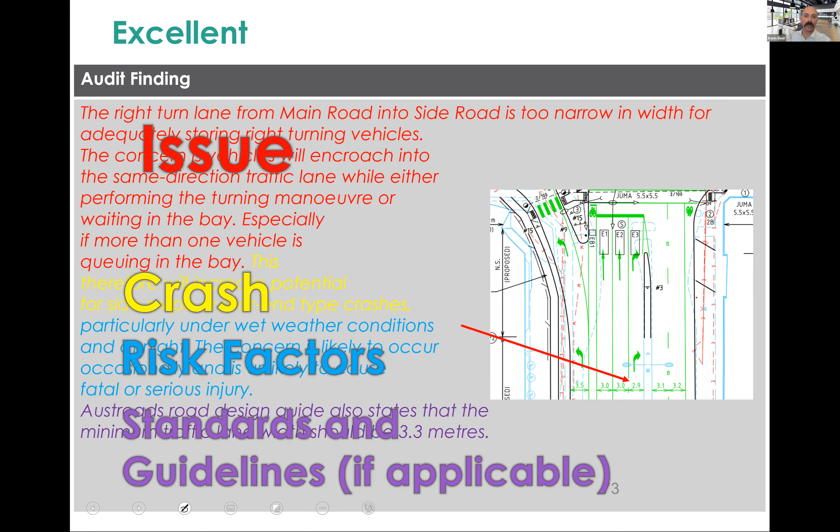And why am I banging on about this particular formula? Well, because you're going to be marked when you do your audit on these 4 elements, or 3 elements, if the 4th one's a nice to have extra bonus mark. Okay.

Road safety audit is not another name for a site inspection or quick check of a design. It's not a crash reduction study or black spot investigation, or a substitute for that. It's not really an opportunity to do fundamental redesigns of the project. Now, that's an interesting one, because we did talk about that other intersection where we said, why don't you put a roundabout in at this location? And that is fundamentally redesigning the project. But there's a bit more of a shift to trying to put those ideas out there. So we're trying to get our best alignment with safe system principles, but that probably goes slightly against that one.

It's not a check against standards. It's not actually seen as a way to prioritize or rank project options. Again, that's one where safe system assessments are the appropriate one. And it isn't a safe system assessment, because that's other stuff. And there's our safety in design check or workshop or the like. So it's not that. But we do see overlap with all of these.

But I do like this idea, and you've got to get this in your head: a road safety auditor, which you will essentially be when you successfully complete this course, is a problem finder. So you've got to try to find the problems before they present as death and serious injury. That is the primary role of the auditor. Solving it and coming up with changes to rectify it, that is just an added bonus for your client. It's really over to them to work out how to solve it.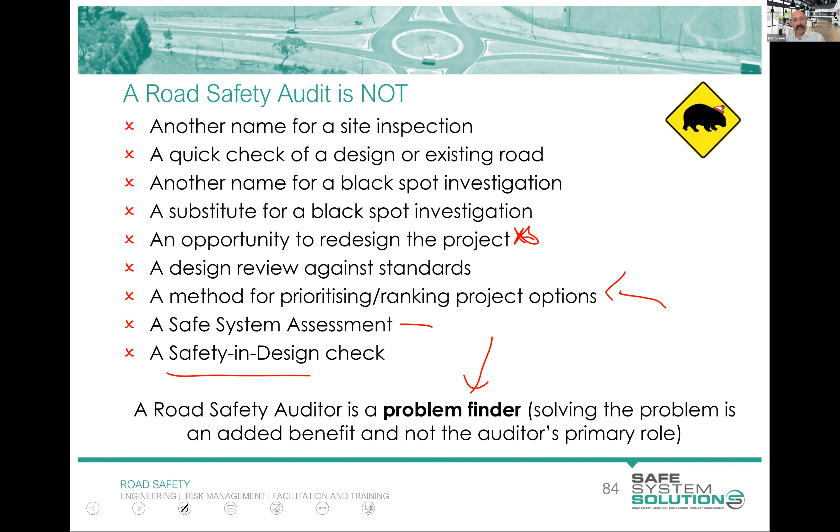They are the ones that know all the financial constraints, the land constraints, the cultural heritage constraints, environmental constraints, the budgets, the timelines, the community. It's a bloody hard thing to build a project like this. So for us to come in looking specifically through this lens of safety and say, this is how you should solve it, I always say no, provide them with some options and make it very clear which is the best and safest outcome, but other options for them to think about.

I've shown this diagram to quite a few of you before. That's the design review, which is where you hand your design over to the person sitting next to you and say, can you do a review of this, check my calculations, check all of that's right. This is the safe system assessment, which has some wider elements. This is safety in design, so we do have overlap, certainly, but this is about it going to be built safely, decommissioned safely, and the like. And you can see audit straddles quite a bit of this and has some stuff on its own.

I think there are some great consultants in this group, and offering that package that covers all of this is a nice thing to do. Maybe design review mightn't be in there, but it's nice to package it all up if you can, due to the overlap and the efficiencies you can get.

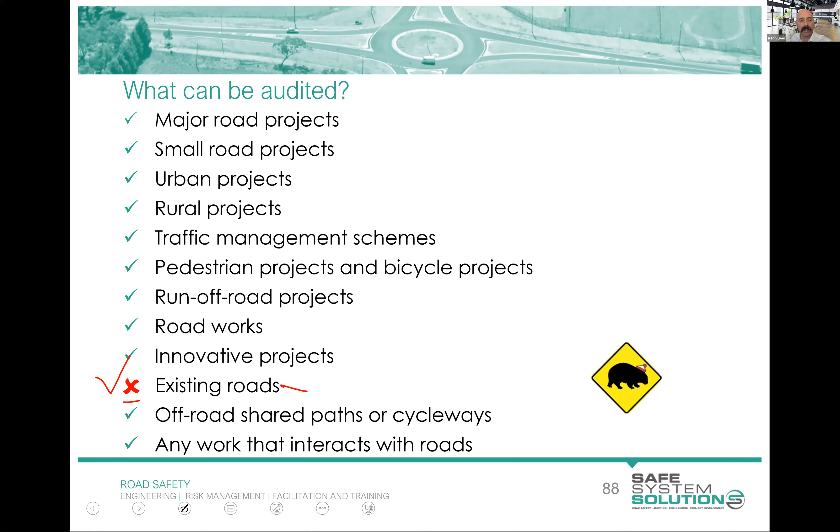But what can be audited? Well, pretty much anything that interacts with the road environment. Big projects, small projects, urban, rural, pedestrian, bike projects, active transport projects, and the like, innovative projects. And usually I have a tick next to this, existing roads, but I put a cross here for New Zealand, because you don't do that, and it's very clearly specified that road safety audits aren't done on existing roads. They can be done just after work has finished to check, but that's sort of just before, I suppose you call it, an existing road.

Here's an example, and I will do this because I think it really says a lot. Here's an example of a road. The road comes up here, give way. We've got the priority road through here. Got this unsealed road here. And the project is a stock standard road upgrade project, sealing the unsealed road to make it like this. So some curbing, some improvements to the intersection, making everything better.

And does this need a road safety audit? Well, the council in this scenario elected not to do a road safety audit because the project manager said, well, we're just making everything better. We're sealing the road, we're formalizing the intersection, it's going to be better, it's sealed, everything's better about it. And we're building to a standard, why does it need a road safety audit? Well, in this case, when they built it, I'll show you a bit of it there.

Don't worry about the burnout marks, they're not the issue. I'll look at it from this direction, there you go. There you can see it. Fairly quickly after they built it, crashes just jumped up significantly. And why do you think crashes jumped up significantly after they finished building this? There were a number of serious injuries in the first year, a fatality in the second year with some more serious injuries, all after this was upgraded.

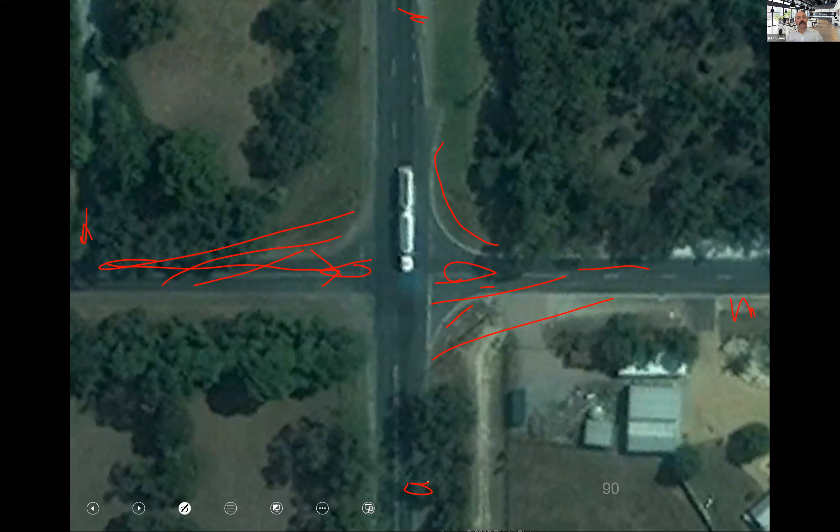Okay, so types of road safety audits. Well, we sort of split these. There's the pre-construction, the construction, and the post-construction. Now, construction ones we're not going to cover because in New Zealand, it's looked at in a different way with the way that reviews of traffic management schemes and roadworks and construction are done. So really, we're concentrating on concept design, preliminary design, and detailed design road safety audits. And then the one immediately after it's built or just before the ribbon is cut.

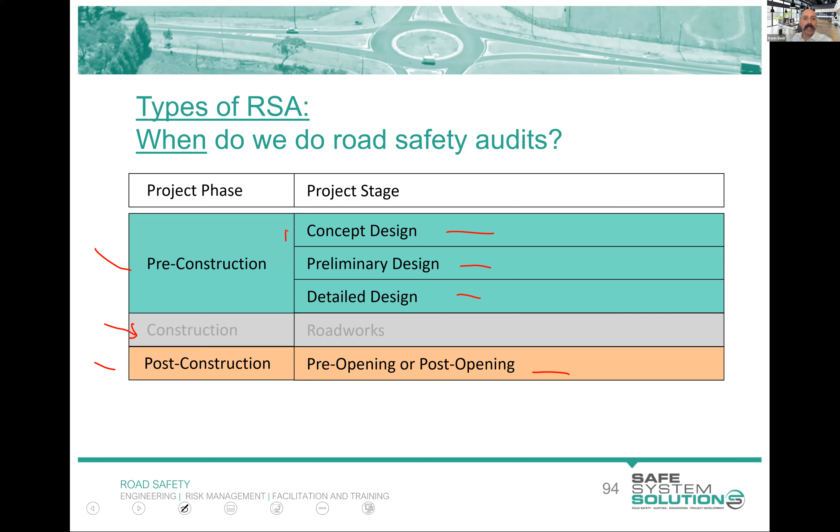And so these early ones, the feasibility and concept stage ones, big alignments. What's the land use? How are the people from up here now going to get down to here? Where would they go? Are these the appropriate interchanges, the intersection forms? What's that going to create? Big. I often call these the planning road safety audit.

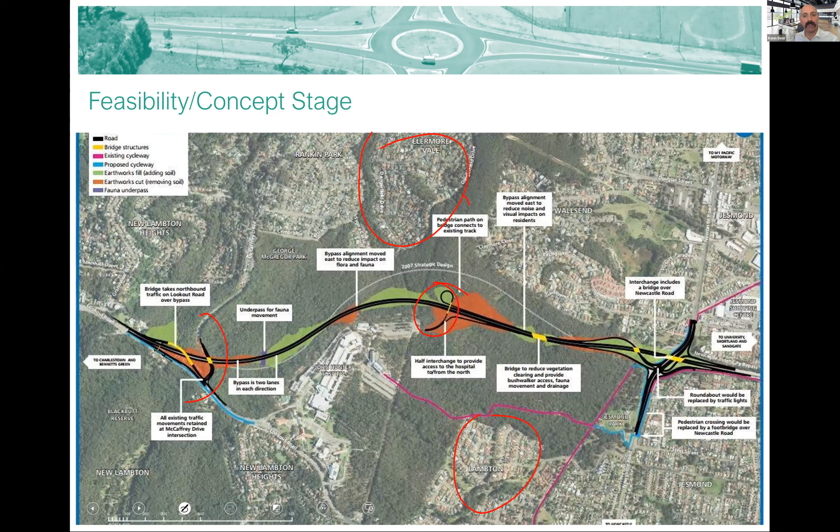You might then get into a bit more detail. You're getting something on an aerial base or a survey base, and you're getting some detail, and you're looking at that in that preliminary design stage.

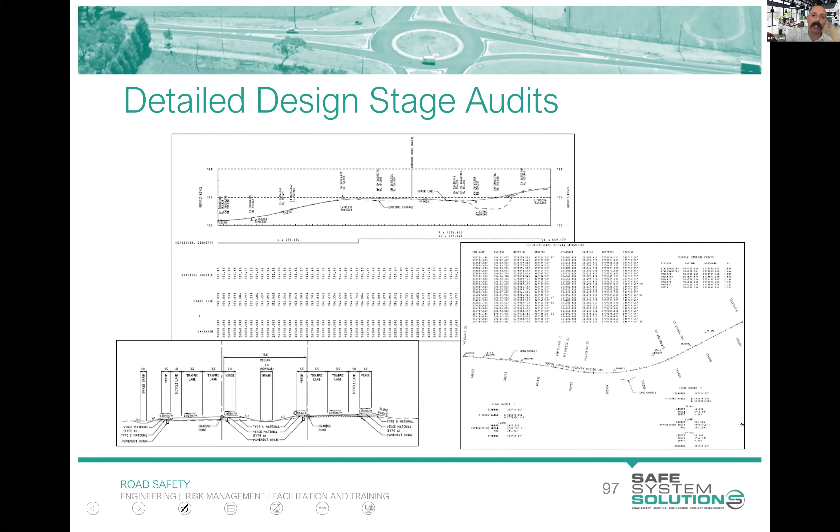Then there's the detailed design stage, and this is where you get the full works. You get the long section, the cross section, the drainage plan, the lighting plan, the pavement, the signal phasing, the lot. This is where you really need people who are very good technical experts in your audit team, because they need to be able to see something like that and visualize it into a road alignment.

And you get lots and lots of plans, and certainly for a decent size project, you can have 583 pages of designs that you've got to be working your way through and trying to understand, okay, what are they going to build? How does that work? What's the crossfall going to be at this location? How's that interacting with other areas?

It's quite a complex, detailed task to undertake, and it takes a lot of time. And as I say, you really need to have that technical expertise, or be part of a team with people with that technical expertise.

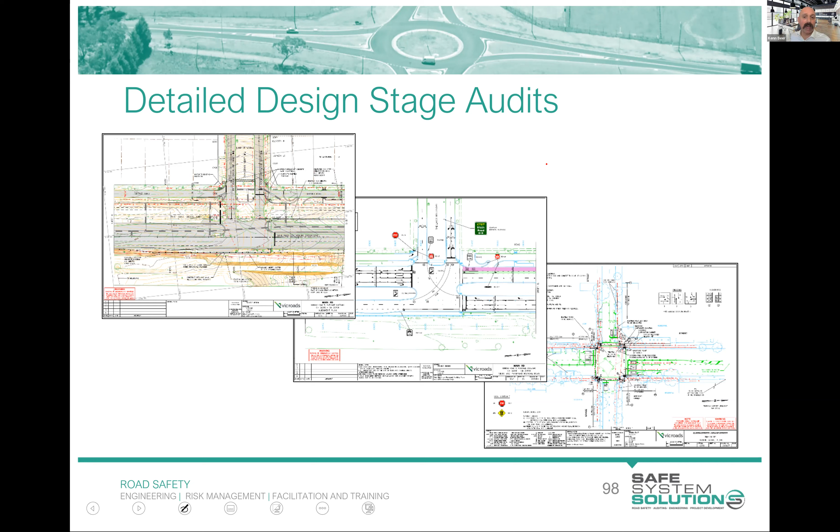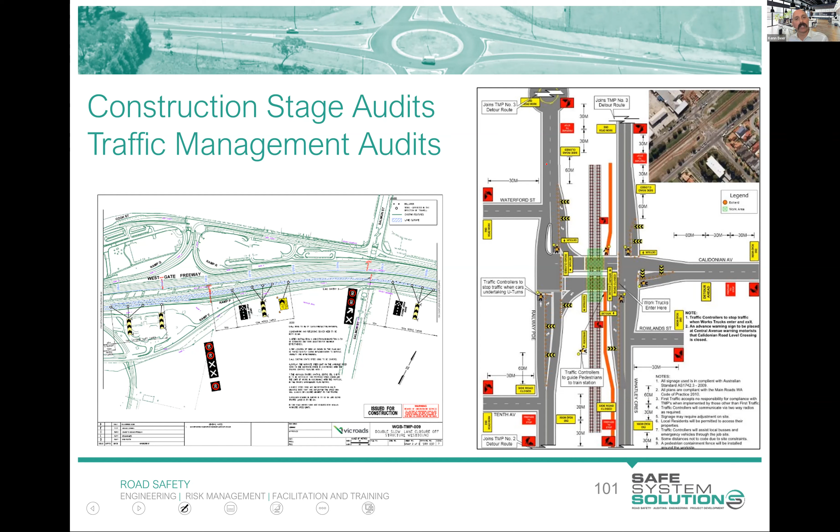As I mentioned, other jurisdictions will do these construction stage road safety audits, which is looking beyond the specific code, beyond whether that's the right spacing of signs and the correct signs, but looking holistically at how people are going to use it, how they're going to access different points, where the detour route's going to put them, is it going to take them near a school, these sorts of things. But New Zealand does this slightly differently, so I'll just push that to the side.

The pre-opening, so I've put this picture for pre-opening because this road's not open yet. You can tell because there's a vehicle going the wrong way on the carriageway. This is where you go through and do a final check. Have they got the RRPMs the right color? Are the guideposts the right way around? Is the barrier overlap right? Is it installed at the correct height? Has it all been put in right? Is it going to confuse anybody at all? You look back: have all the past audit findings been rectified appropriately?

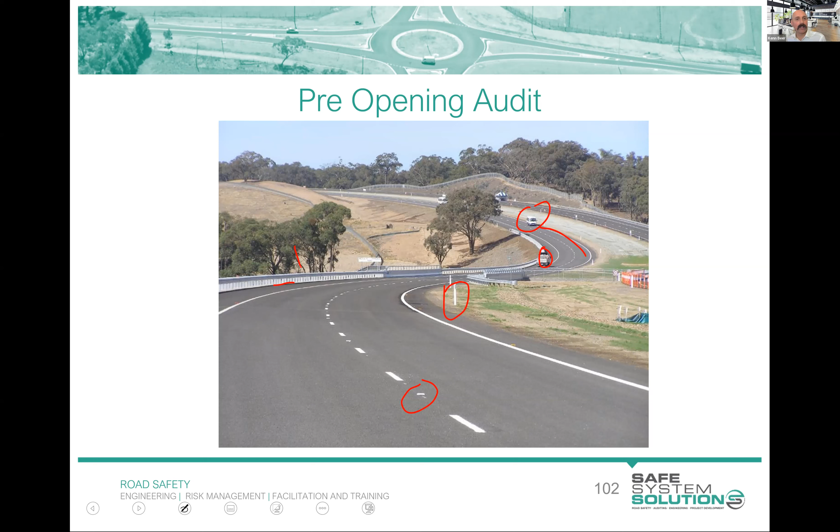And with this one, occasionally you need to be really strong and say, this issue needs to be rectified before this road's open. And they can be quite interesting when they've got the minister coming out to cut the ribbon, and you're saying you can't do that.

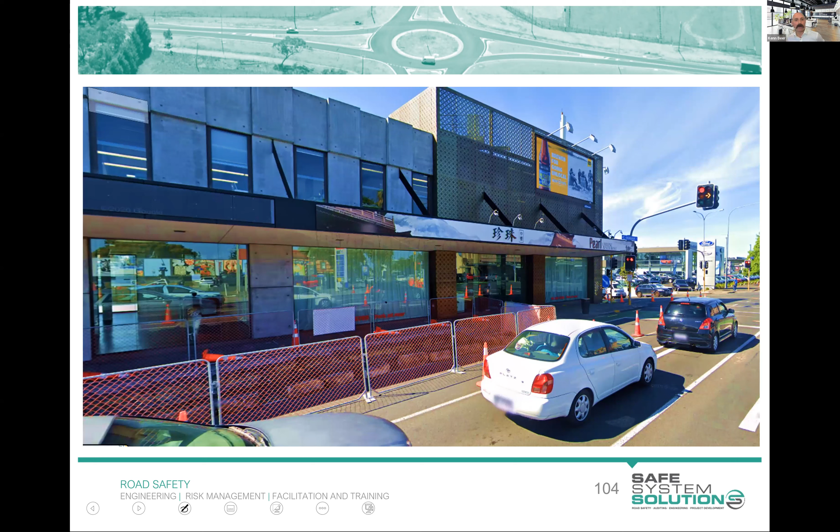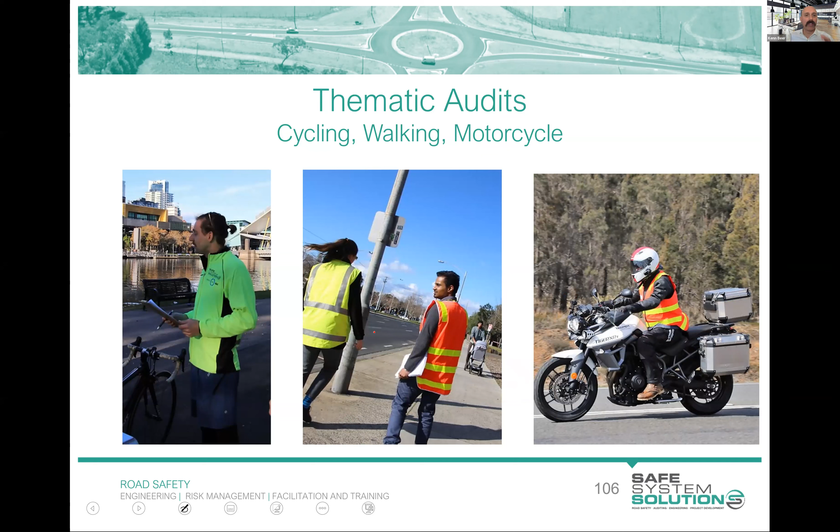There are these thematic road safety audits, taking a particular road user and looking at things through their lens in particular. And we'll talk about these as we get to each of them.